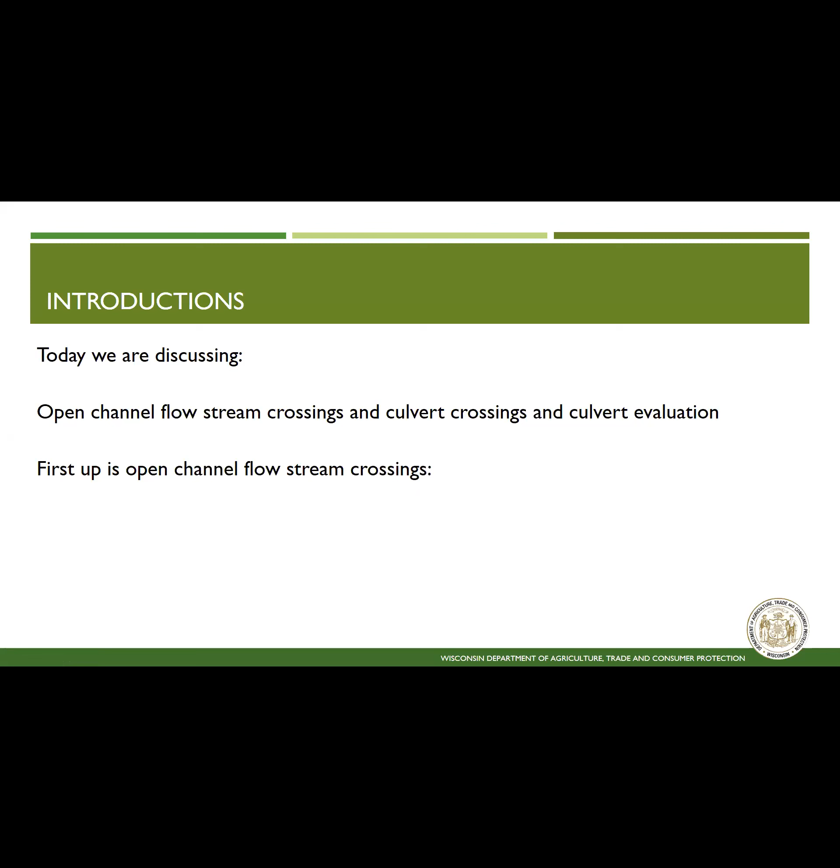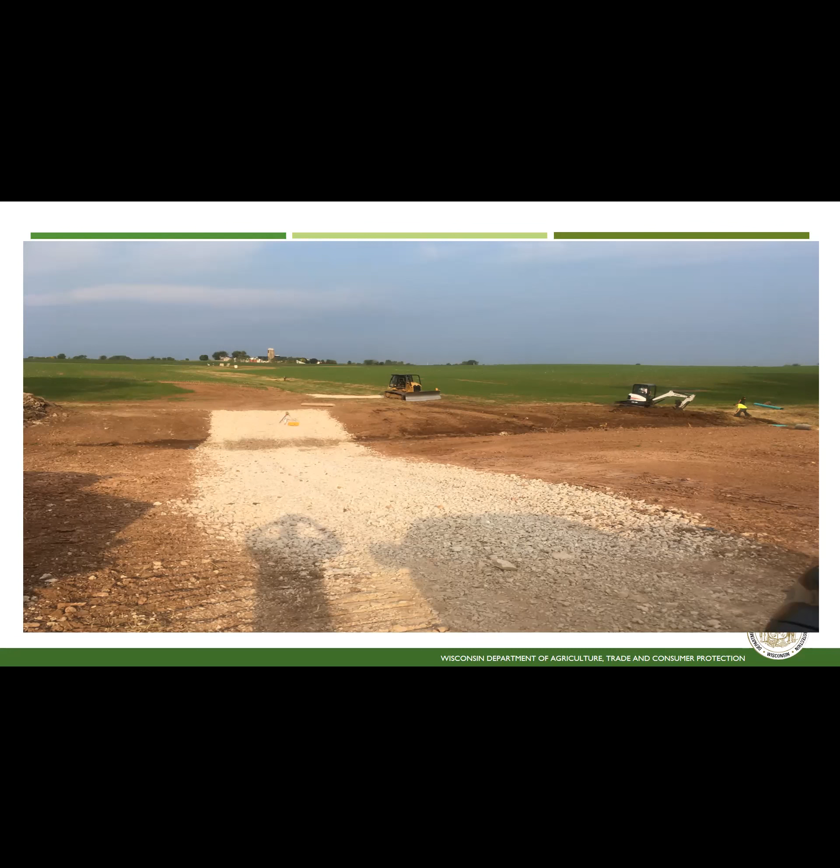This is another crossing. This is a simple one. And again, crossings are simple. This is a crossing in Fond du Lac County where we're simply crossing a diversion. This is during construction, so it's a little muddied up.

But crossings are simple best management practices to address the resource concern of getting from one point to the other, whether it's animals or whether it's equipment. So you have to have a fundamental knowledge of this, because when you're doing other larger BMPs, grass waterways, terraces, diversions, stream bank protection, at some point in time, you're going to want to cross and get to the other side.

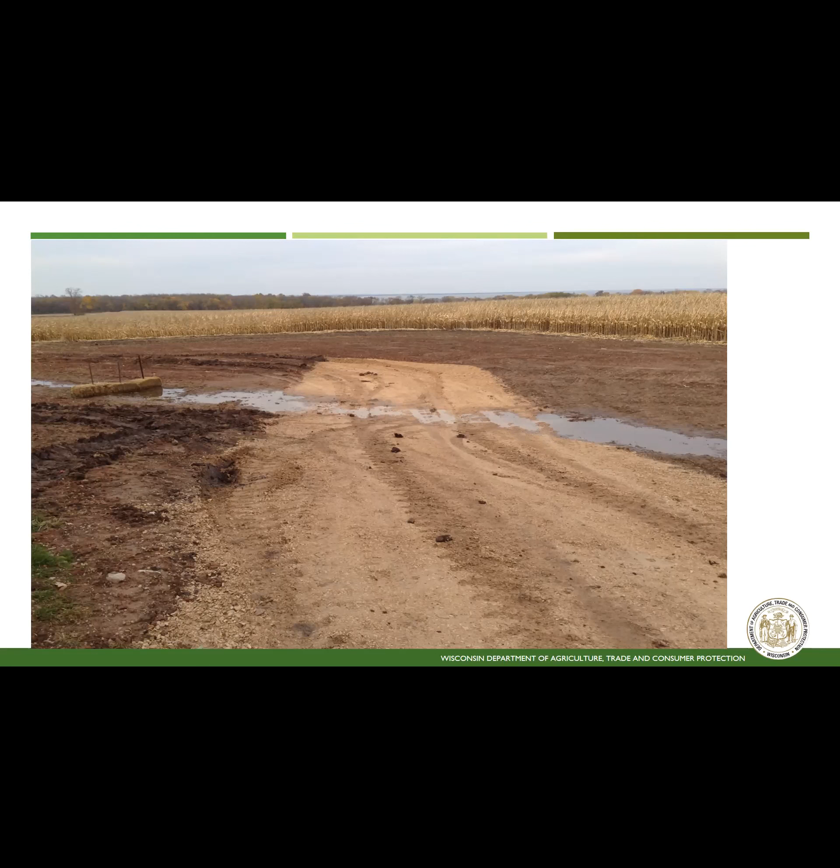So I encourage you to listen to what I have to say. This is not an in-depth design course. I only got 45 minutes, but there's a lot of resources out there, and you have a lot of resources right within your department just by looking at the list of folks. There's a lot of folks out here who design more crossings than I have. But it's a practice that you should know. Every up and coming technician should be able to design these open flow type practices.

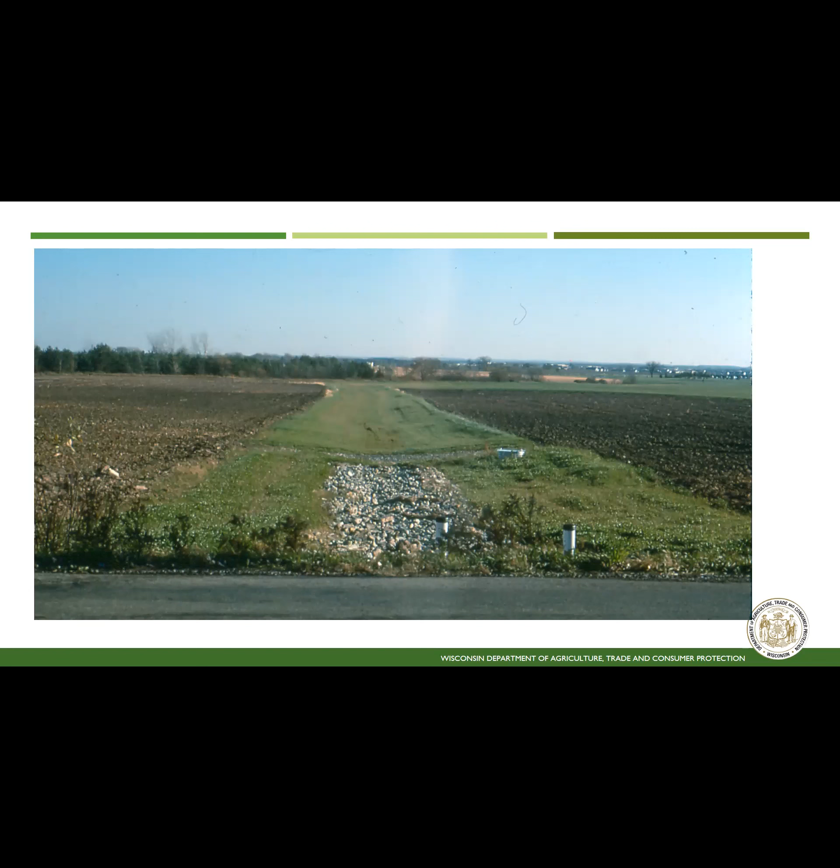So what are we doing? Well, we're referring specifically to NRCS Conservation Practice 578, stream crossing.

One of the things I have to remind you, and I encourage you to do, is read the standard. And I know that sounds really basic, but I read the standard, and I read the standard, and I read the standard. When I design a practice, I read the standard to make sure I read it. When I'm reviewing your designs, I read the standard. I read the standard until I'm blue in the face, because there's always stuff to pick up in it. One of the things I personally try not to do is memorize standards, because they change.

Their standards are going to change every 2 years. We tweak things, we add things, we subtract things. As conditions change, we might modify the standard. Back in the day, we had 2 standards for manure pits. Now we've got 1. So again, I cannot emphasize the fact that when you're working on these practices, the standard is there. They're fairly robust standards, well thought out. And I cannot emphasize enough, read the standard.

So the big thing here is in the 578 standard, it'll have a statement like in every other standard. It'll say condition where practice applies. And this will say, hey, if you're going to do this type of practice, this is where it works. So this is from the standard. You'll see I'll paraphrase a lot from the standard in my presentation. So again, the default is always read the standard. But where does this practice apply?

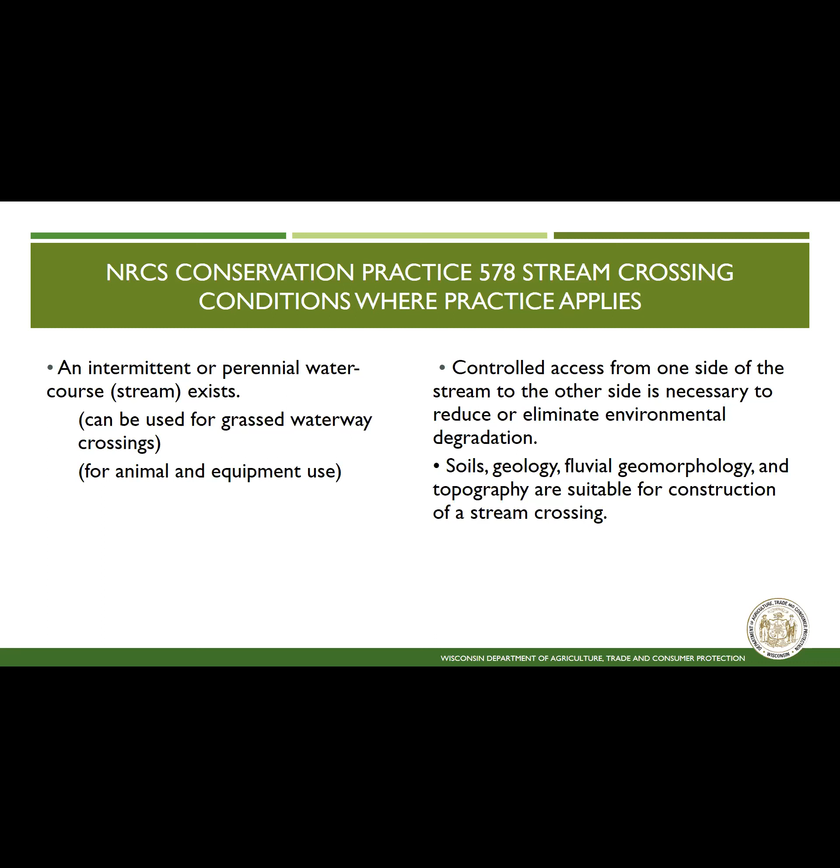We're going to focus a little bit on planning, then we're going to get into design, and then we're going to talk a little bit about construction. And it's not just going to be all PowerPoint presentation. I will let you know I have a lot of photos, and we're going to do some discussion. So again, please chime in either via the chat room, or if you want to unmute yourself, I'm all for that too.

Big thing with location considerations: locate the stream crossing where the stream bed is stable, or it can be made stable. One of the things you don't want to do is put a stream crossing where, the first time the landowner drives through it, they get stuck. That just undoes everything you did. So you have to do an evaluation of whether or not that stream bank is stable, or whether it can be made stable. And what I mean by stable, can I add stone to it?

Can I add a geotextile to it? Can I manipulate it in some way, shape, or form so that when I drive through it, or the animals walk through it, I've got that resource concern protected? That's where, a lot of what you're going to have, especially in this practice, you're going to have a lot of best professional judgment.

You're going to have to make those evaluations by physically taking a look at it. You want to avoid placing crossings where the channel grade or alignment changes abruptly, where excess seepage or instability is evident. You have to look not just at the crossing site, but upstream and downstream from it. You don't want to place that crossing where it's going to be unstable, because the creek or waterway might be in unstable condition. You don't want to put a crossing right before a corner on a creek, because that's where high tractive stress is going to be. So you have to look at it in terms of geomorphologic placement, preferably putting it on a straight section and minimizing impacts.

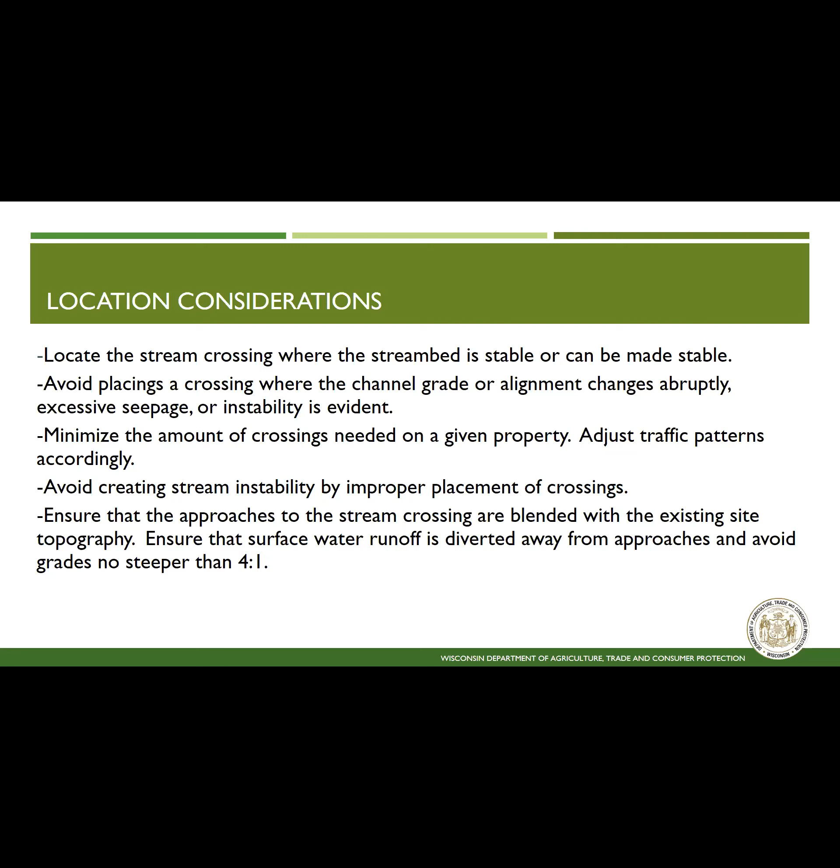Make sure the approaches to the stream crossings are blended with the existing site topography. Crossings are great, you get yourself across the creek, but how you physically get to them might be a whole other matter. You might actually transition from a crossing into an access road, so you'll go into the access road standard, and you'll see that in a couple of these photos.

Other considerations: you want to know what the landowner is going to use it for. Am I going to run cattle over it, or am I going to run combine equipment? I had a question yesterday about that—they're going to run combine equipment. How high does it have to be, with large equipment versus small equipment?

What you have for existing soils—you have to do that on almost every practice. It's called foundation investigations. You want to look at what you've got and make a determination whether the foundation is soft or firm. You can do that by sticking your boot in there. You step in it; if it feels firm, it's firm, if it feels soft, it's soft. It sounds simplistic, but you have to physically go out and look at it, and maybe get your feet wet a little bit.

You want to avoid wetlands or low areas. Some areas you can't avoid it—you can put a crossing in a wetland, but it's going to be hard to get permits, it's going to be a little more rigmarole, and it's going to be a lot more robust. But I certainly don't recommend it.

You need to know whether it's year-round use. You go out on a day like today where you still have frozen ground and the animals still need to get across—can I use it year-round? Is that something the landowner can manage? Can they plow snow off it? Does it get too icy? When do I need it? If they're going to need it year-round, it's going to have to be a lot more robust.

Most importantly, you don't want to obstruct normal flows. One design criteria says the channel cross-section in an open channel has to exceed the channel cross-section of the existing channel. We'll get into this a little bit, but you can't obstruct normal flows. If your crossing obstructs normal flows, water is going to go where it's going to go—most likely around your crossing—and it's going to erode on the flank. You also want to avoid seepage, excessive grades, or channel alignment changes. Those are just bad conditions you want to avoid.

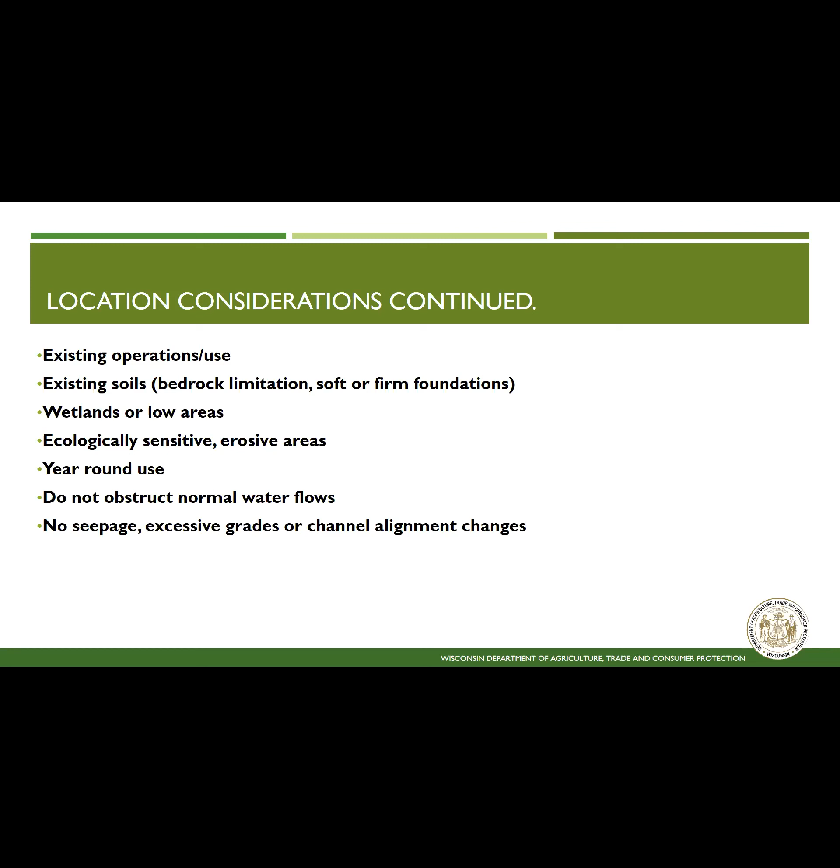I stole this from the presentation last week, and I thought it was pretty good. This is a creek that was actually destabilized by a poorly installed crossing. I stole that from the 580 presentation—I think it was two weeks ago. I thought this was perfect for my presentation.

If you look at the photo on the left, that's the downstream photo, and the photo on the right is the upstream photo. The issue here is that the crossing they're standing and looking down at is actually above the bed of the creek, so it's actually functioning as a minor dam. It's going to pond water behind it, which will drop the sediment out, and then force the water over top of that, creating an unstable condition below it, which is probably causing some type of head cutting.

By improperly placing this crossing, you're opening yourselves up to all kinds of future possibilities for failure. So be cognizant of where you're placing it, and make sure you get below the grade of the stream bed.

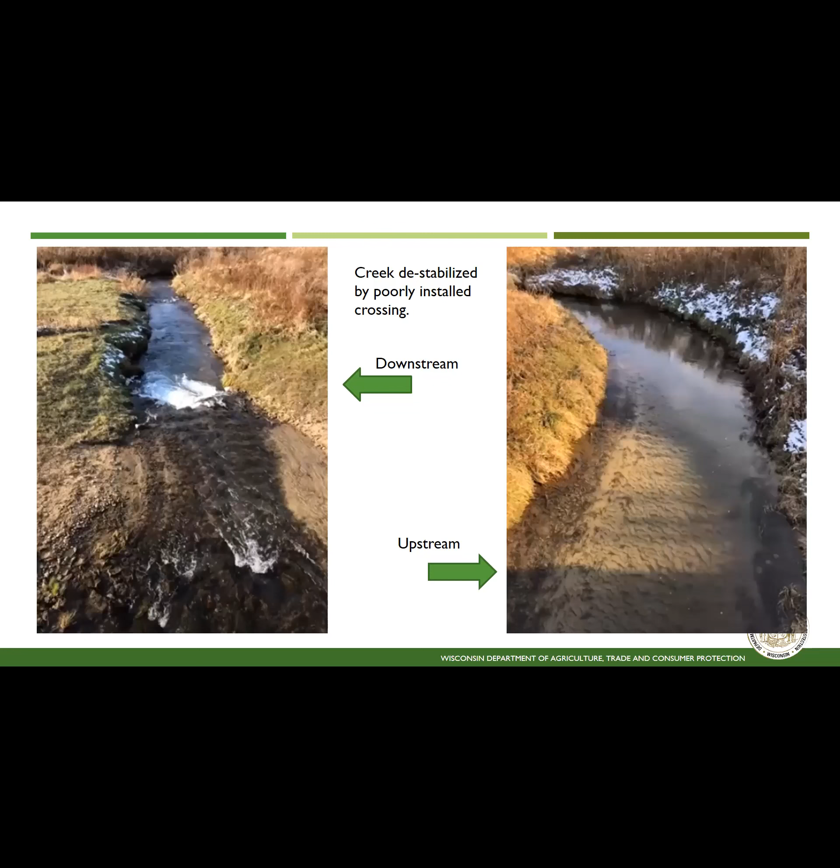You look at this photo, this is a concrete crossing with precast panels. Looks good, I don't do a lot of these myself, but I looked at this existing condition. What's wrong with this photo? In low flow conditions, which still carry the base load, it's above the elevation. So there's no question in my mind that at some point I'm going to get a sediment deposit, or if the water can't pass this because of the crossing and excessive vegetation, it'll find its own path, likely beyond the protection you provide at the crossing. So be cognizant about how you place these culverts in the watercourse.

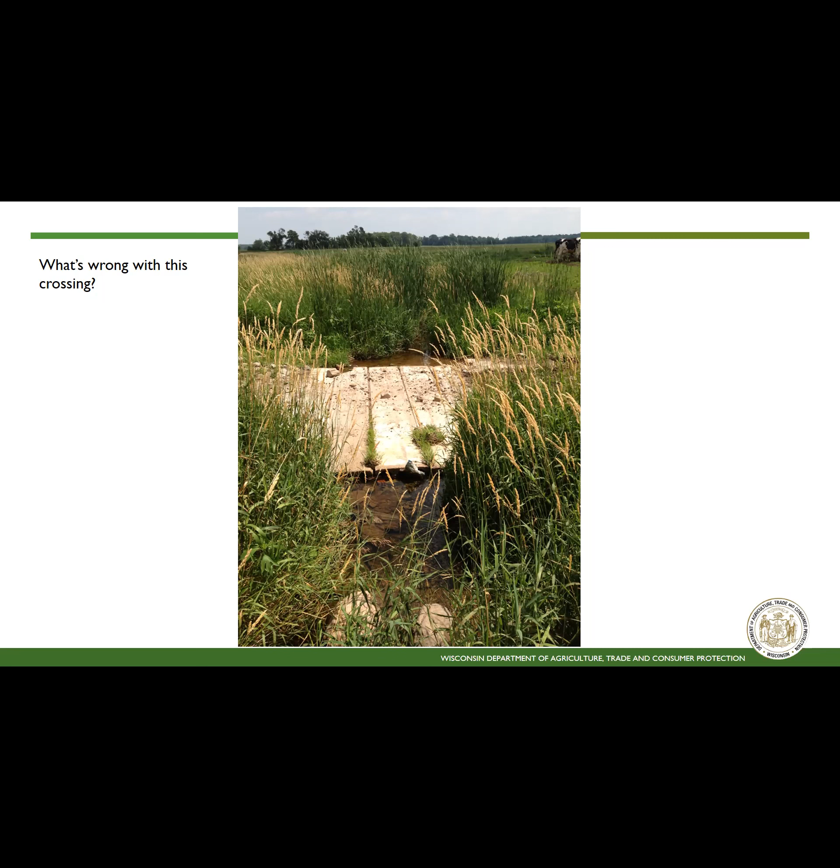The technician really worked on this stream bank. Since I've got a farm here and here, the landowner needs to cross. What I like about this crossing is even in this sinuosity, this curvy section of creek, the technician picked possibly the straightest section he could to install that crossing. Then he installed it well beyond what he considered the 10-year storm or bank full flow - you can see it extends well out, so it's protected. It might not be protected in a flood event, but he took it well outside and tied it in with that protection, so there's no gap.

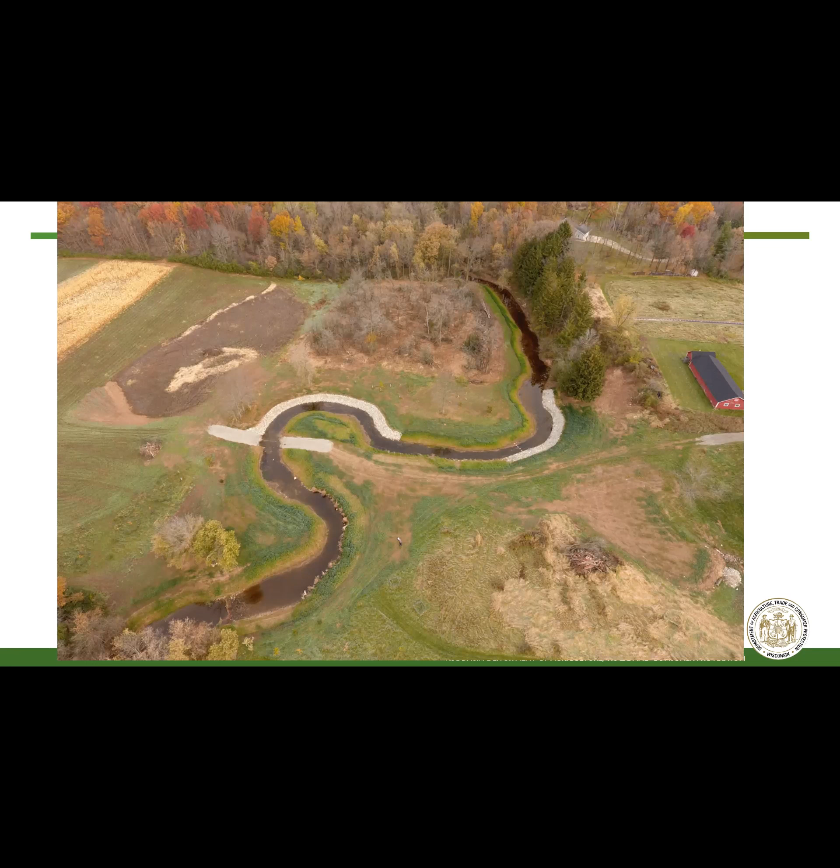The crossing width mimics the width of the stream, both upstream and downstream from it. So to me, this looks like a pretty well planned crossing, and ultimately it should be a success - meaning it's around for a while. Last year, in 2018 and 2019, we had a lot of severe hydrologic events, a lot of practices failed due to conditions. We're getting to the realm where we have to make these practices just a little more robust than the 10-year storm, due to the rate we get storm events now.

This is another typical use of a crossing. Here you've got a grass waterway, nicely netted with an erosion control blanket. The landowner needs to get across to that grass waterway, and instead of going through multiple points, we opted to do the crossing at the end. It's a smaller crossing, and below we have a good wetland scrape in wetland enhancement. We actually pulled out some cattails and created open water habitat as a means for a stable outlet. We're also using this crossing as a stable outlet before it gets into the wetland. Folks have tried this before - this isn't a classic use of it, but it's one way to do it.

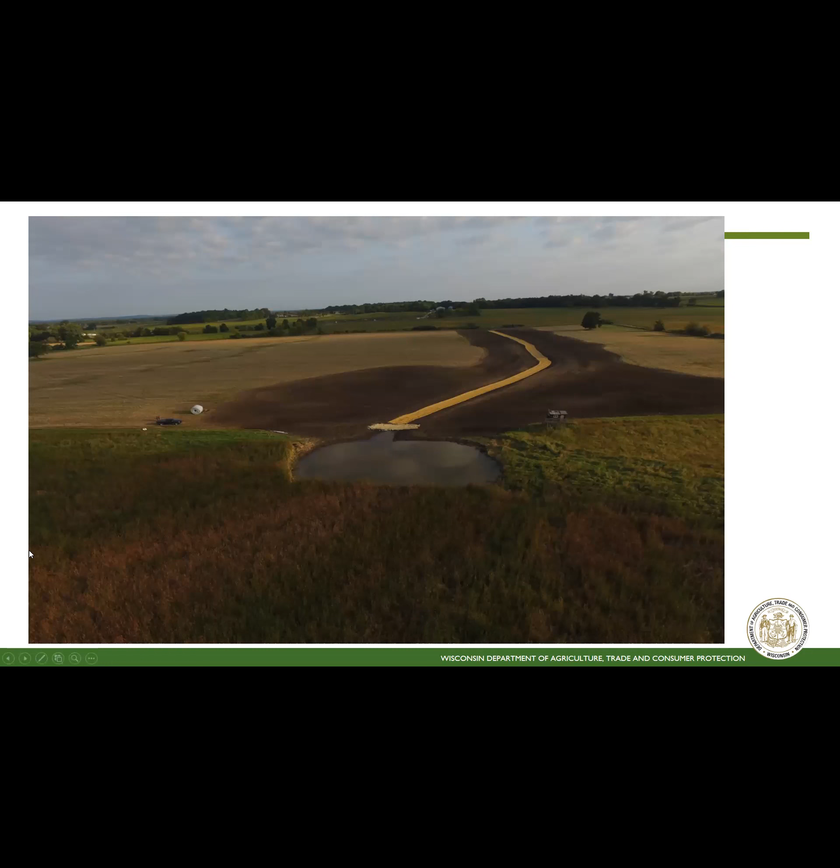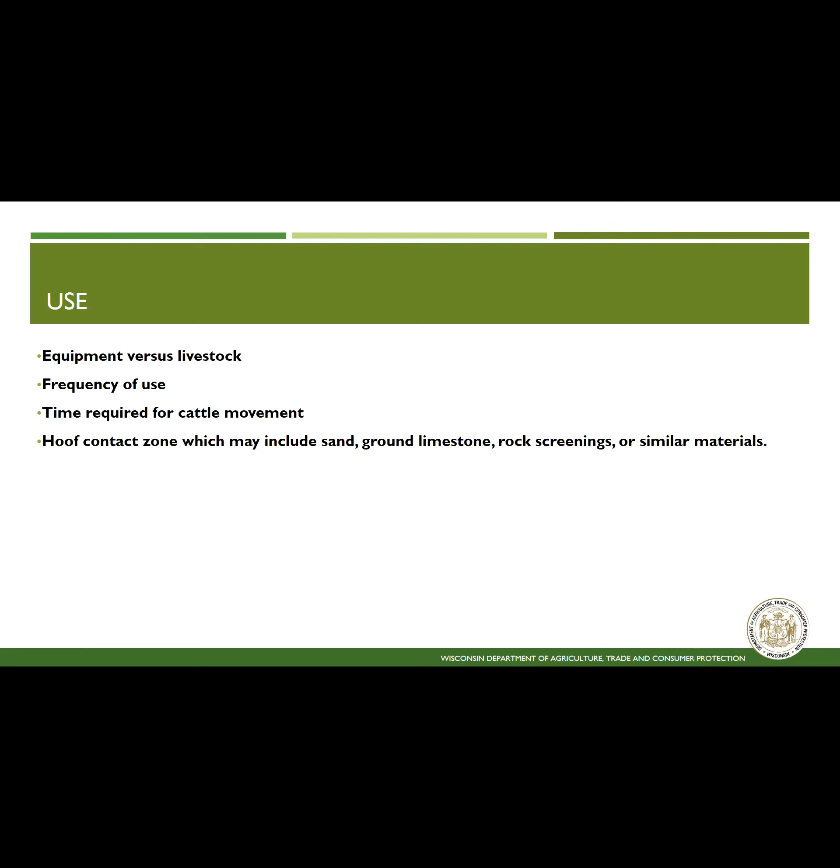Keeping in mind, hoof contact zone is kind of a sacrificial material. We're not designing the hoof contact zone for the 10-year storm or bank full flow, but we're designing for the animals. So I specifically ask the landowner on that. If other people have different thoughts on it, I'm all ears. But that's just kind of been my practice in the last some odd years I've been doing this.

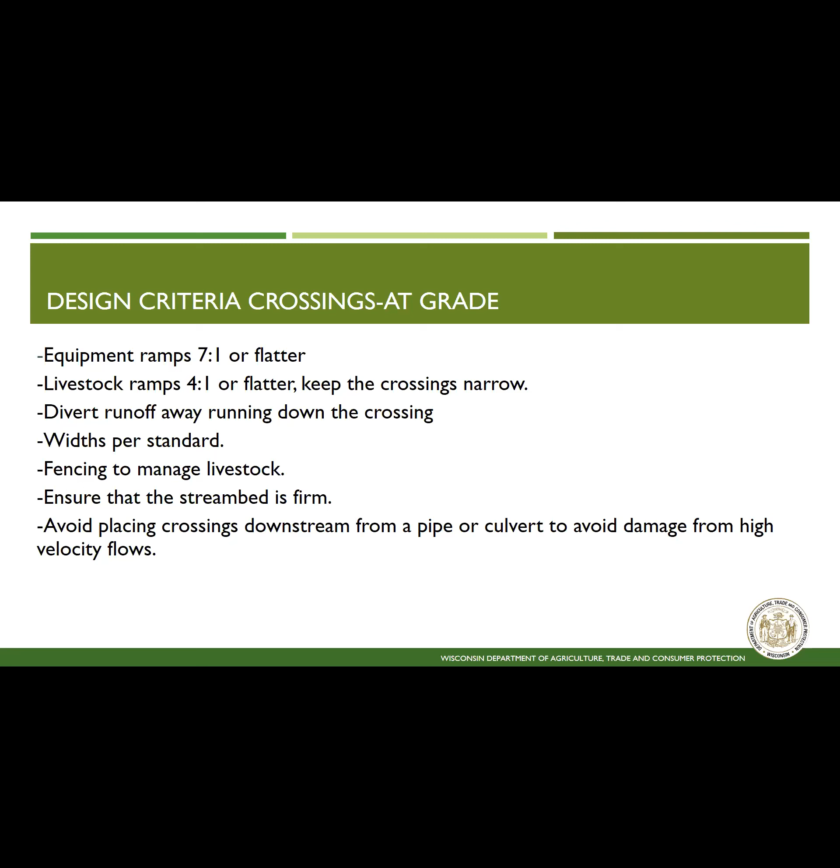So when I do have a flood event, I've got total containment. I don't have a weaker area for that flood flow to go around. And here the fencing is robust enough that I think it will be able to sustain what we need to do. Here's another view of it looking the other way, and it takes it well up into the crop field. So this is a classic example of a crossing that has been combined with an access road, and it looks like a big crossing, but it's really two different components blended together, and it looks awesome.

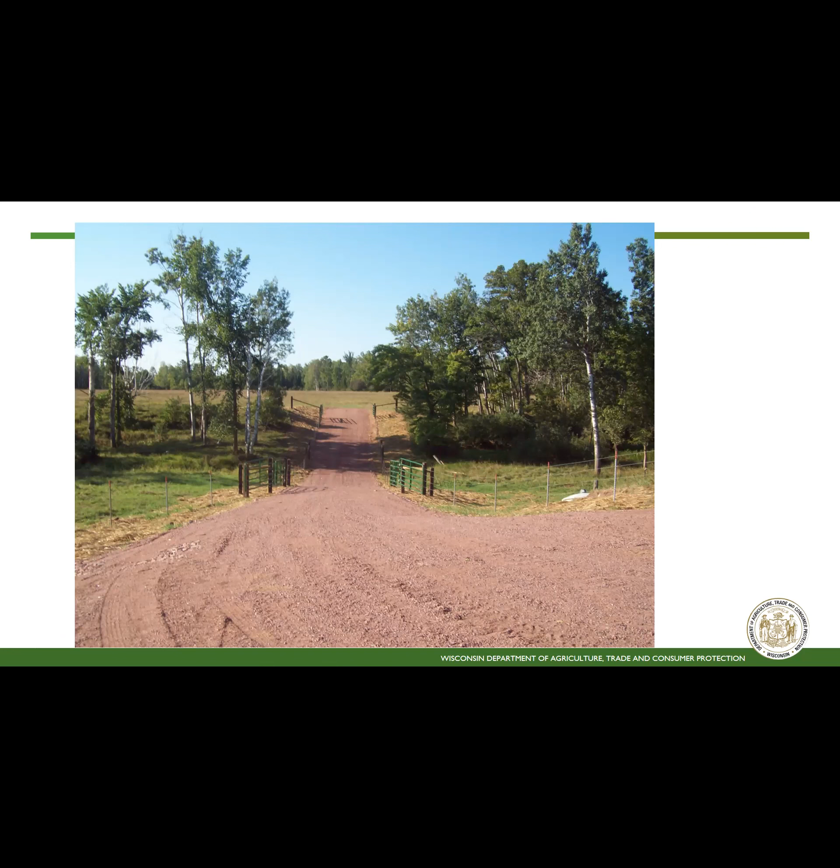Okay. All right, design criteria, crossings at grade. Ensure that the cross-sectional area of the crossing is equal to or greater than the natural channel cross-sectional area. This is critical, okay? Typically, when you're going to make this crossing, you're going to give it a greater area, but you're going to run a survey through the existing area where you're actually going to plan the crossing. What you plan beyond that has to have a greater cross-sectional area. If it doesn't, you're squeezing that creek tight, and that creek is still going to find a place to go, and it's either going to flank you or cut into your crossing or do something you don't want.

So you have to ensure that the cross-sectional area of the crossing is equal to or greater than the natural channel cross-sectional area. You do this by taking a survey, plotting out that survey, and then overlaying it with what you're planning on doing. Hey, I'm going to do a crossing that's 12 feet wide with 8-to-1 side slopes. It'll show you in the design calculations that, yes, you've addressed this component of the standard.

To the extent possible, design the top of the ford crossing to follow the contours of the stream bed. Right? That's the best way. Now, again, Pete just brought up that point where you've got that thalweg channel, or lower flow channel, that might be a sediment concern. So that might be something to consider if you're in a high sediment producing area. If you're in a forested environment, maybe it's not a major issue. But if you've got a high sediment load agricultural area with a lot of erosion, you've got to think about it.

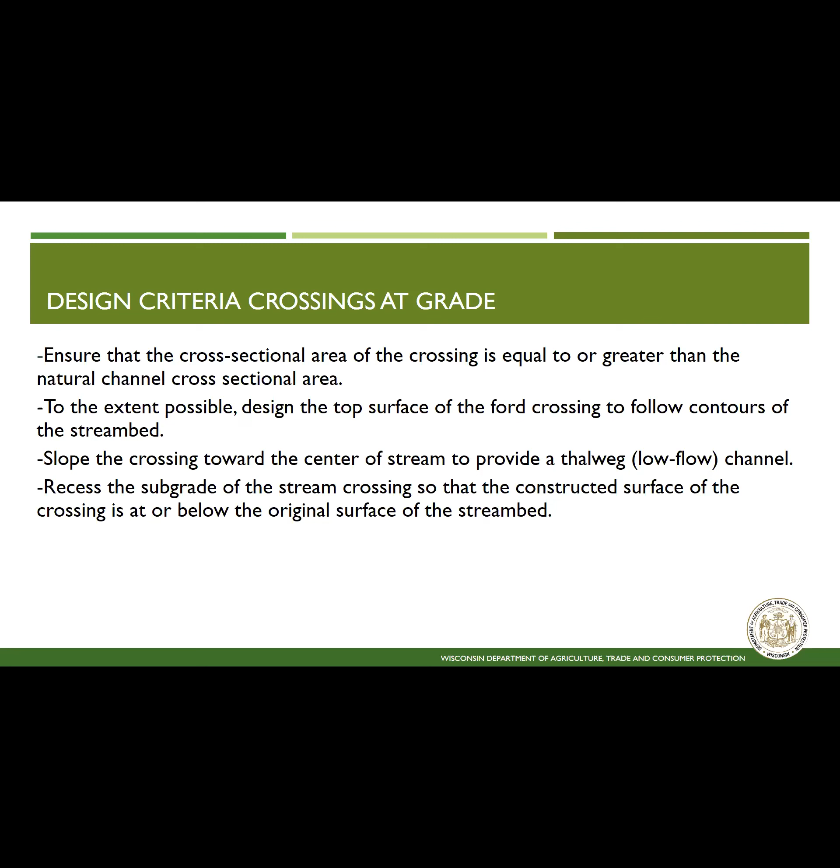All right, Kelly, what do you got? Let's see, since it's mostly related to what you've got going right now, I had a question from Josh: after the rock is placed, is topsoil ever placed back on top and seeded over? Say I have a stream crossing at a park where the trail is used for hiking and small machinery, so having a seeded top would be preferable.

Yes, or you could keep it as rocks. You could do that, but again, all your top dressing is kind of sacrificial, and that's where you've got to use your judgment.

For example, say you do your crossing and top dress it with soil, put down an erosion control blanket as much as possible, and it's not a wet period—not a period of high inundation like 2018 and '19. You put your topsoil down and get some seeding established. You have to accept some loss, because people are going to walk on top of it, and you're putting an erosive material within the crossing you're trying to protect. But on the flip side, you still get some protection from that vegetation.

So to me it's a practice worth trying. One thing I tell people who work with me: I don't have to get a 100% solution. If I get a 50% solution, that's better than nothing. So especially for a trail in a park setting, where you've got other factors involved, it's certainly worth an attempt.

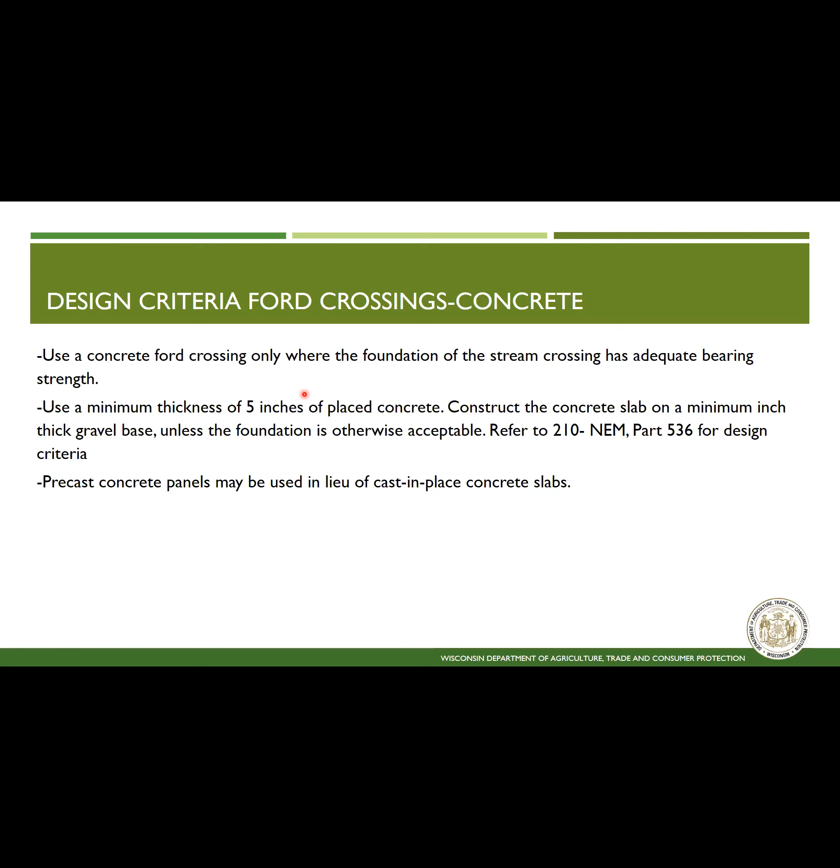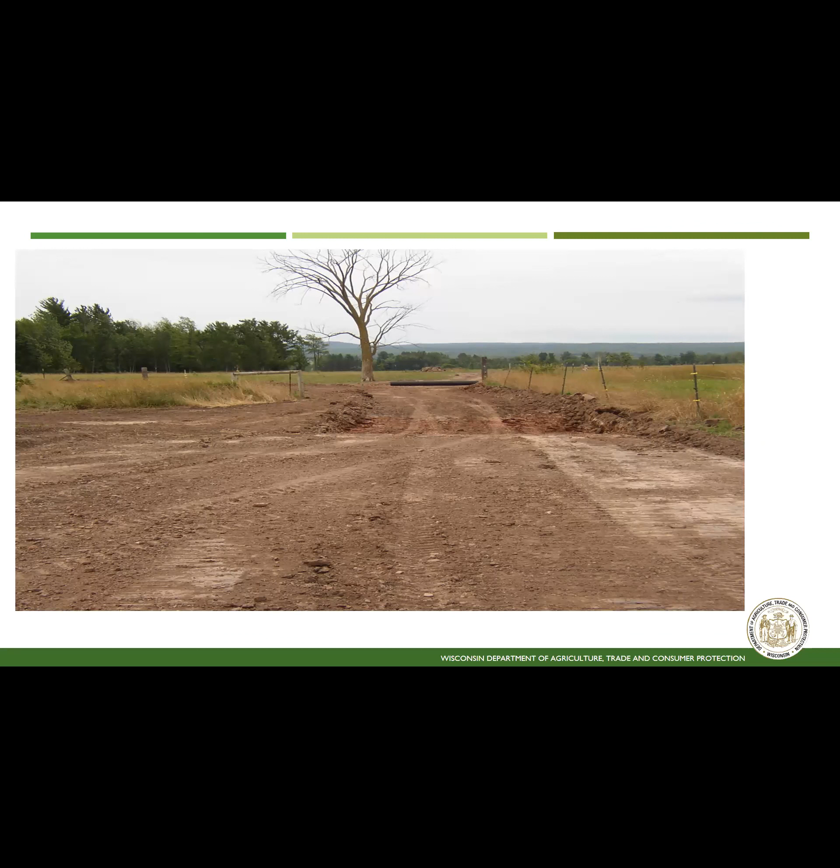So this is a photo of the excavation for a concrete crossing. You look at this and you say, well, this looks like a good solid clay material, so it should be robust. You form it out, you put your reinforcing steel in there, and you pour your concrete. This is another one—a longer one where they took it well beyond.

This is a nice option, it provides a decent, robust surface, and it gets to be a little bit fairly pricey. I know I'm encroaching on my time a little bit, so I will speed this up.

Design criteria for rock crossings: this is typically what we do. When you use a geotextile, you use it when you have a soft or unstable subgrade. You're always going to use non-woven type 2, class 4 is most used. I never in my career use woven geotextile because I don't want to do the percent fines test below it.

Make sure you go to Wisconsin Construction Spec 13 for the details on the types of geotextiles. More importantly, if you're not comfortable with that specification, go to the guide for use in the Engineering Field Handbook, Chapter 17. There's a guide for use for this specification, and it really does an awesome job explaining what woven geotextiles are, what non-woven geotextiles are, and what the tables really apply to. If you got questions, you got plenty of DATCP staff out there that can step you through that.

You're going to cover the geotextile or excavated bed with graded rock as shown in Table 2. Table 2 is fairly straightforward, I pulled this right out of the standard. If you got soft foundations, you got 18 inches, or 8 inches underlain with geotextile. If you got firm foundations, you've got 8 inches.

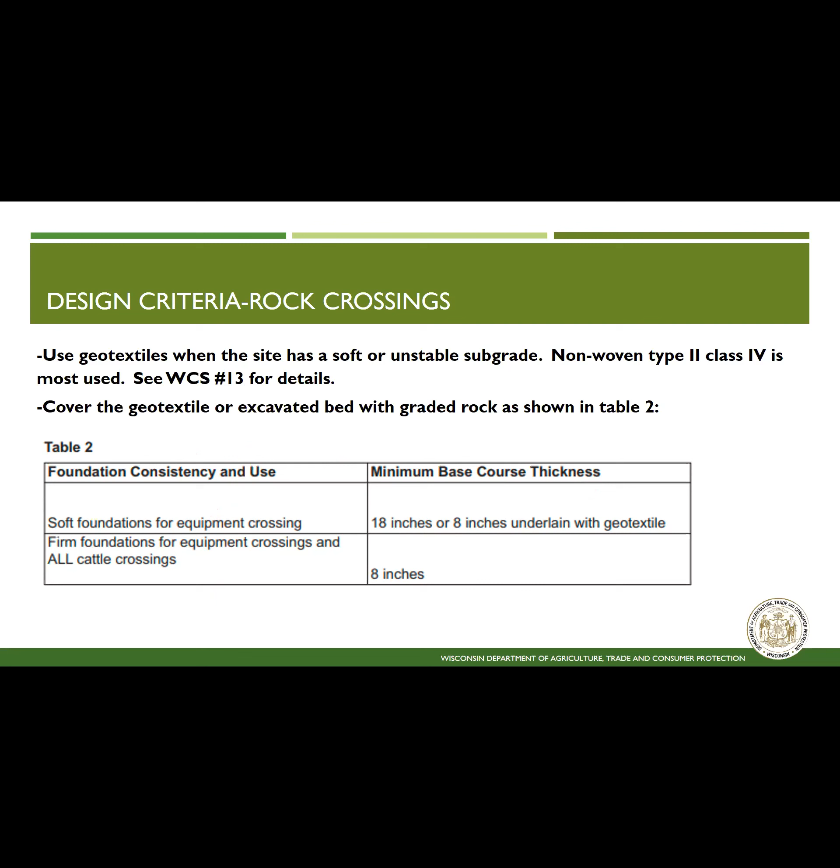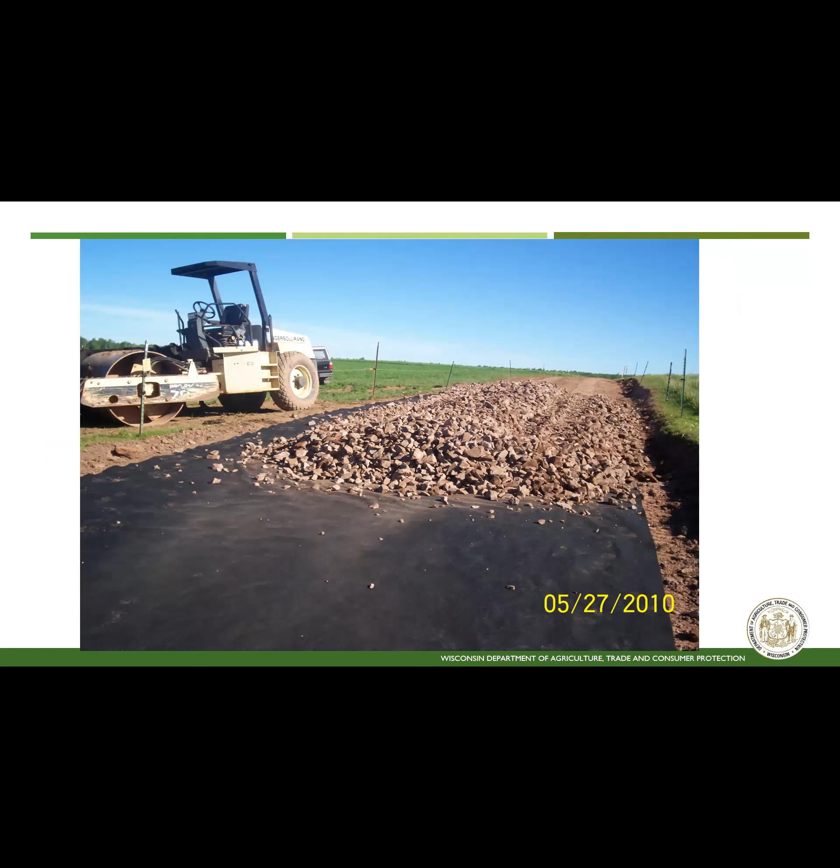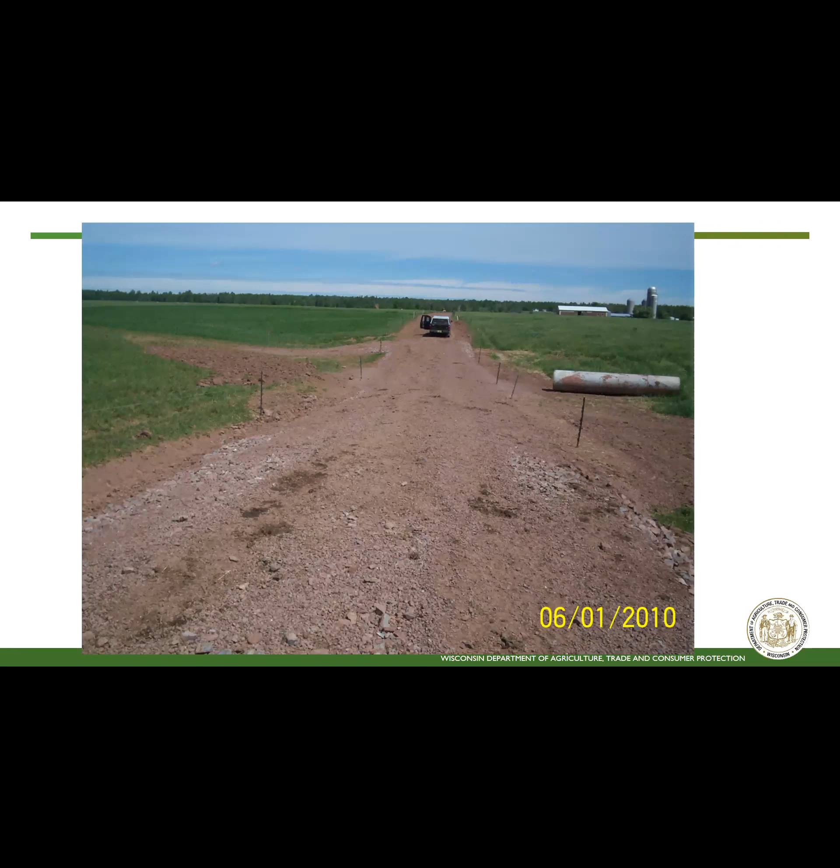Most of the crossings I do that I get involved in use some type of geotextile. And then here's the top dressing, and that's showing the hoof contact zone. Final product. Geotextile really gives it a lot of strength, and when you got a little bit of seepage, it's pretty decent.

So here's a big statement, right out of the standard. Okay, so now we're getting into design. We shift gears from planning. We really want to know, how do I design this, right?

You need to design the rock ford stream crossing base material - in other words, the stuff that's going to resist that design flow, not the hoof contact zone. It's got to be stable for the 10-year storm or bank full flow, whichever is less. In other words, I'm going to figure out what that 10-year storm is, whether I use EFH2, TR55, or USGS method.

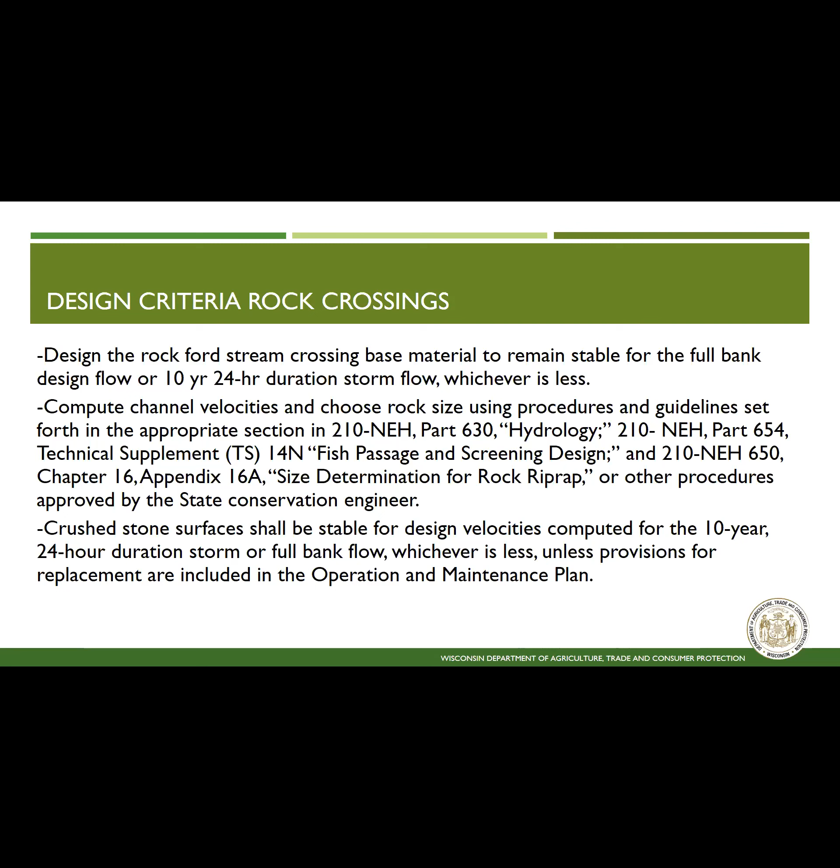I'm going to put that quantity of water in my cross section, and I'll show you the spreadsheet to do this. I will see what elevation that 10-year storm is, or by visual means, I'm going to determine what my bank full elevation is. Then I'm going to use an equation called Manning's equation that will help me get my velocity.

I will tell you my default is the 10-year storm because I think it's more conservative. I'm very aware of climate change. I had a couple of practices fail, especially last year.

I'm more conscientious that maybe our practices are not as robust as I think, especially just the way things are changing. So I've decided that I'm going to be more conservative in my design. In a lot of cases, I automatically will drop to the 10-year storm event.

What this chart is, and I may be doing a little bit backwards, this is the stone size as it resists velocity. So you're going to use Manning's equation, which I'll step through in a little bit. That will help determine your velocity, and then your velocity equates to a stone size.

What this stone size - it says D50 in inches. What does D50 mean? D50 is the middle size stone in a given pile. So if you got a pile with 6-inch stones and 1-inch stones, your D50 size would be 3 inches. You're always designing for that median stone size, and it's basically based off weight.

So you'll have to run a gradation. We run a gradation where you've got big stones, a lot of medium-sized stones, and a few small stones. You mix them all together, you got a decent gradation. When you're doing these rock crossings, you have to design for a gradation, and you're designing for the middle-sized stone within that pile.

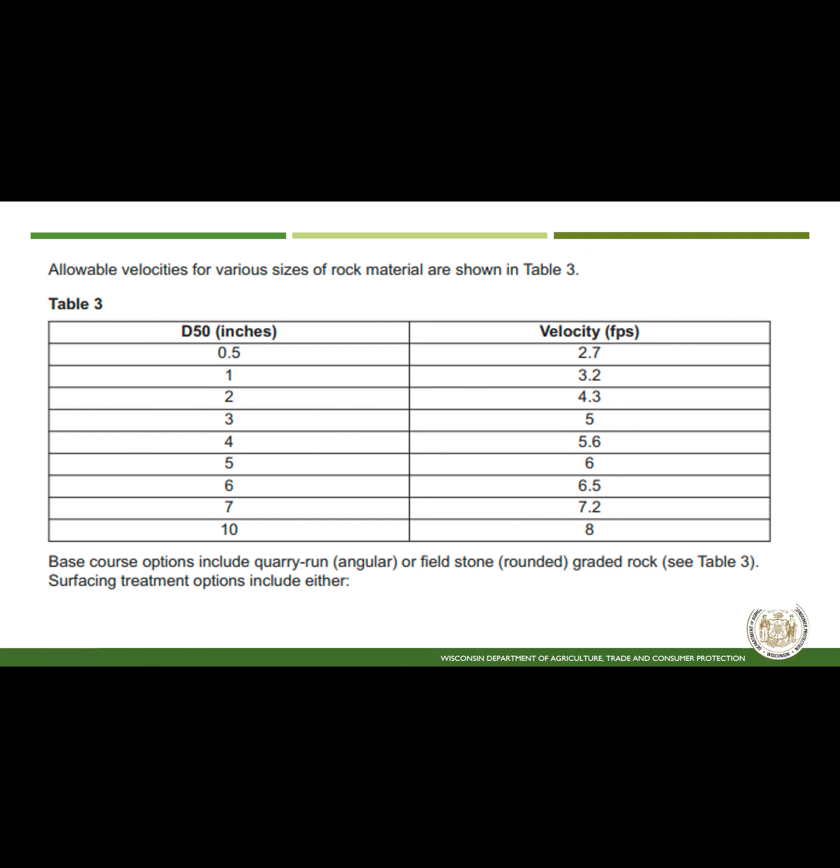Do you ever have the contractor bury or dig in the geo edges like on the standard drawing? The book answer is yes, but honestly, no, I don't. Not often. I think it's important on the upstream side for sagging, to be honest with you. But in most cases, it's rolled out, laid out, and that's just a technician talking. That's just what it is. I'm picky about overlaps, obviously, big time, and I'm very picky about the product.

I'm so picky on getting the right product. I ask for the manufacturer's test data before they buy it, and then I compare it to what's in WCS 13, so what they're buying is right. The apparent opening size, the elongation at failure, all these minimum test requirements, you actually meet them. So I'm more picky on the product, but I dig in upstream and downstream, upstream ends specifically, but on the sides, can't say I have.

Pete, what's your advice on that? You still there with me, Pete? Oh sorry, I was typing a comment, Drew, when I missed what you said. So do you bury the geotextile on the sides? I do it on the top ends, but do you do it on the sides? I haven't done it on the sides. I suppose you have to, but I don't.

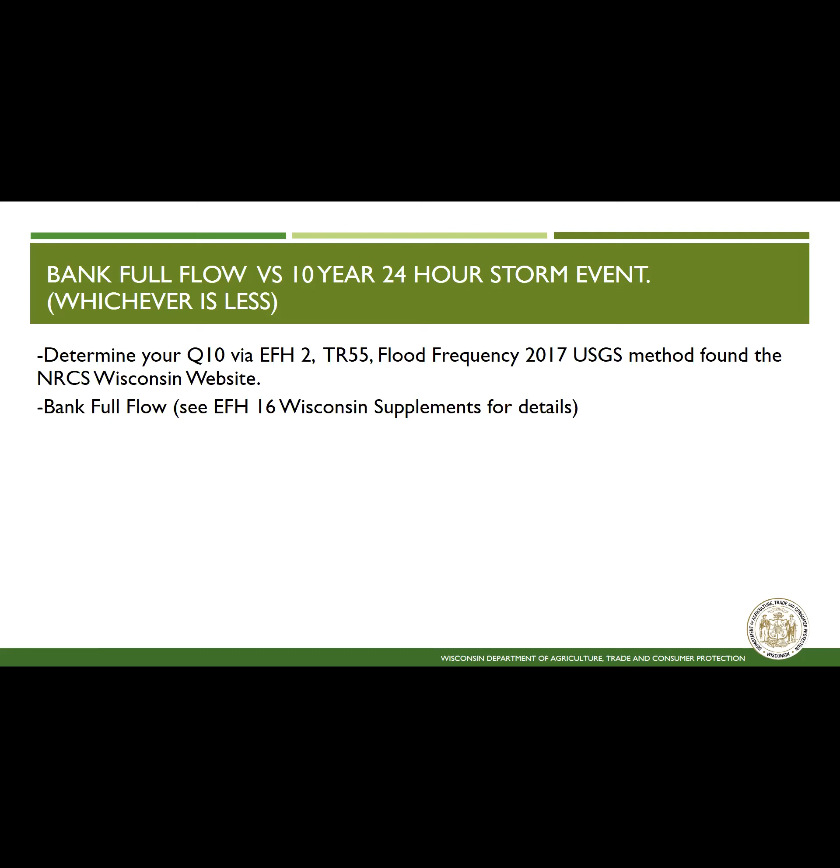That's good. Okay, so again, the standard says you got to design for the Q10 or bank full flow. Travis, I'm going to punch through this, man. I know I'm encroaching on your time by 3 minutes.

Here is a list of bank full flow indicators. I'm not going to read them to you, but I will tell you where this information is found: the Wisconsin Supplements, Chapter 16. It's specifically for stream bank design, but that's where I pull this information from. Make sure you're getting familiar with where the resources are. The stuff is right online. You go to the NRCS website, Wisconsin Supplements, and this will tell you what your bank full stage indicators are.

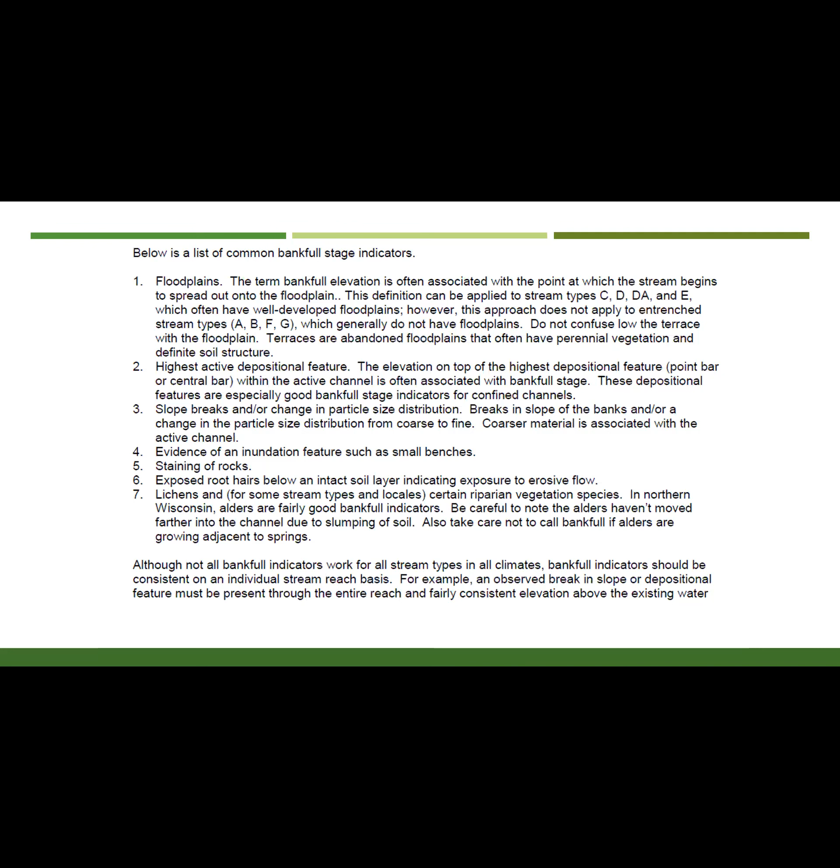Again, you have to design for the 10-year storm or the bank full flow, whichever is less. Here's 7 ways to determine what the bank full stage is. Once we get all that, we're designing by the velocity method, so we use Manning's equation, the most favorite equation that we all love and follow. It's the only equation that I actually can remember without looking at my prompts: 1.49 divided by n times the hydraulic radius to the 2/3, times the slope to the 1/2.

You run that equation with your Manning's n value, you will get velocity in feet per second. I take that velocity to table 3, and it will tell me what my D50 size stone will be. That then sets my gradation.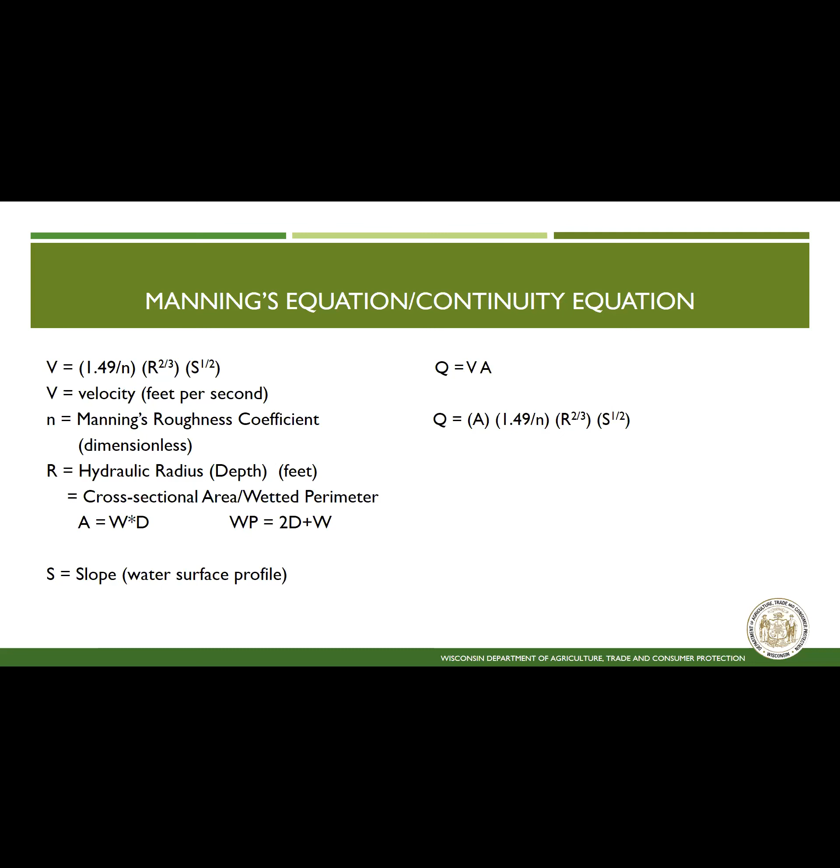Now, Manning's roughness coefficient, in layman's terms, is how smooth or how rough things are, and they equate that to a number. You could Google Manning's n values and there'll be a list a mile long. In a stream bank, you can either calculate it - this is pulled out of Natural Channel Flow for stream bank design. You can actually calculate it; here's your basic n value starting at earth, which is 0.020.

And then you add these modifying factors and figure your degree of meandering. I don't necessarily use this for a crossing. What I use is the formula method and the Manning's n value for the stone I want to use. Keep in mind when you're designing with stone, you want to make sure you can get the stone. For example, in Northeast Wisconsin, I can get D50 size stone 6 inches almost everywhere. My coworker, Ryan Glassmaker, told me that last summer it was hard to get D50 size 6-inch stone in Southeast Wisconsin because they were crushing it all down to gravel.

So I like to look at availability of stone, and then I use that Manning's n value. I know that getting a D50 size of 12 or more, which I don't ever use, but I know I can pull that out of the Valders quarry. So figure out where your stone is coming from and figure out what sizes you have available.

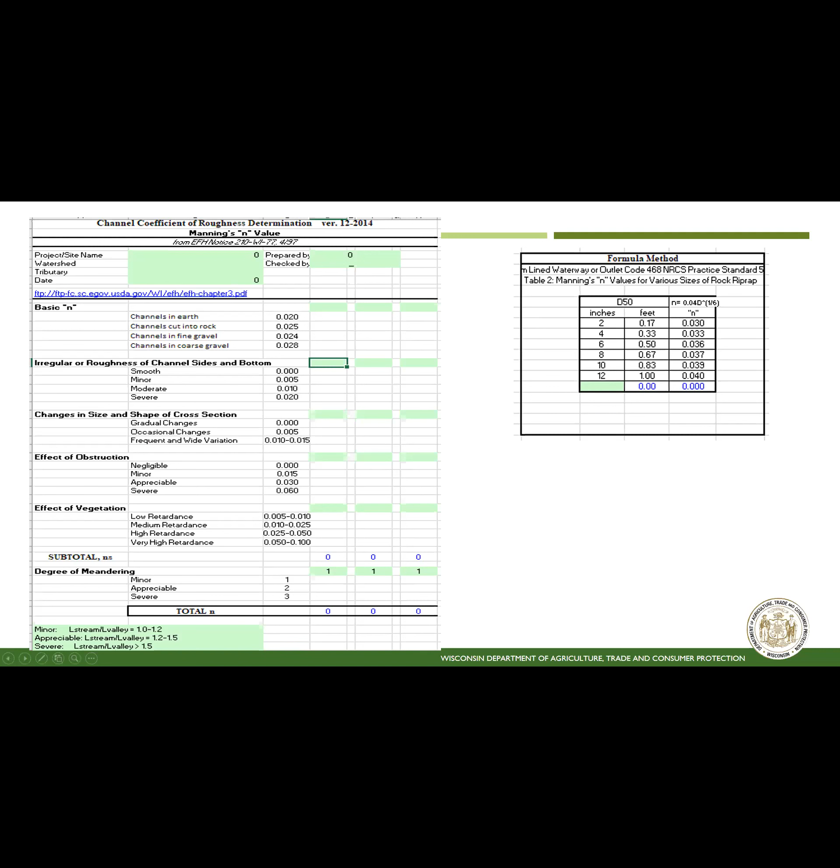You don't want to truck it three counties away because then your crossing is going to be ridiculously expensive. Use that Manning's n value and stick it into the Manning's equation. That will set your depth. Manning's equation, simple for open channel flow, you pull it off the NRCS website. It's fairly straightforward. Your inputs are your side slopes, your bottom width, which should be equal to or greater than your creek, your depth, and your slope in feet per feet, based off your survey of the water surface profile.

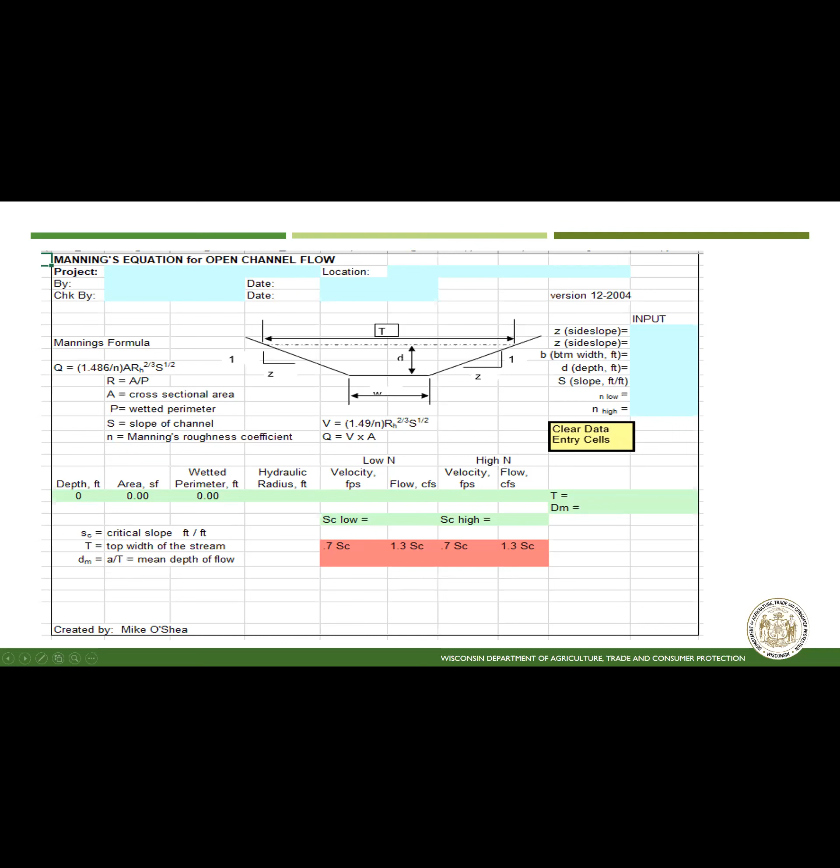This will size your crossing for you. You can also use this program, Natural Channel Flow. This is an awesome program where you enter in your cross-sectional distance, your elevation, your Manning's n value, your upstream water surface elevation, your downstream water surface elevation, which will get slope, filling in this Manning's equation, and then your water surface elevation within that channel. So you can move that up and down until you get the capacity of that 10-year storm.

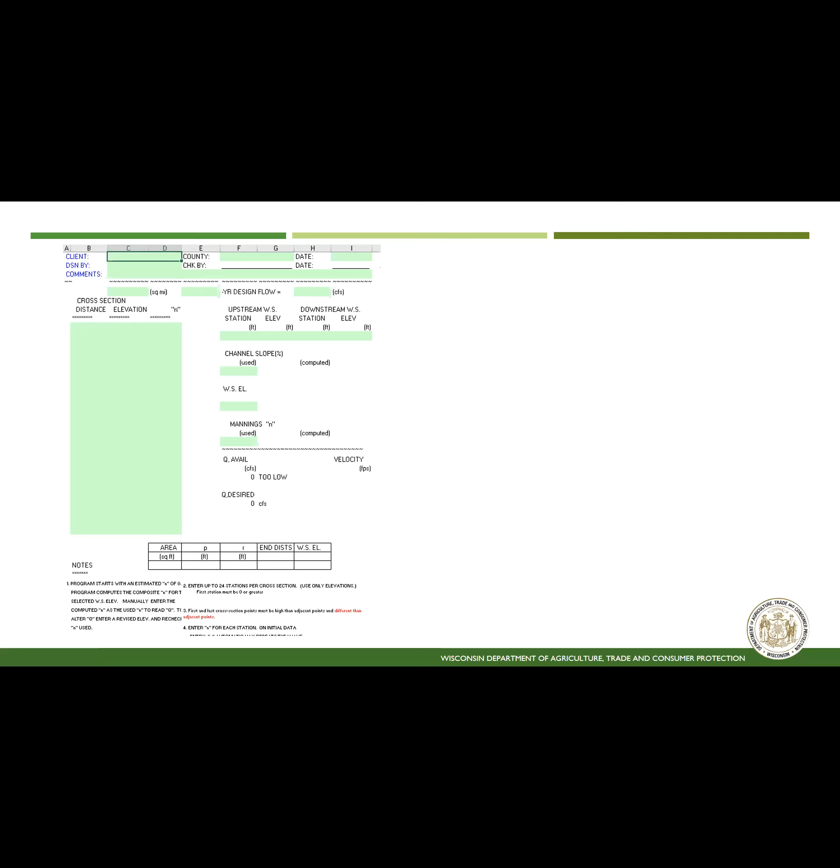So you're going to raise this elevation in your cross-section up until that 10-year storm fits into this. And I realize I'm going fast, but what I recommend you do is when you get to this point, call your DATCP and call your NRCS assistants, or more importantly, ask people within your counties. Again, I look at this list, a lot of experienced people out here. There's a lot of help out here. Don't try to figure it out yourself.

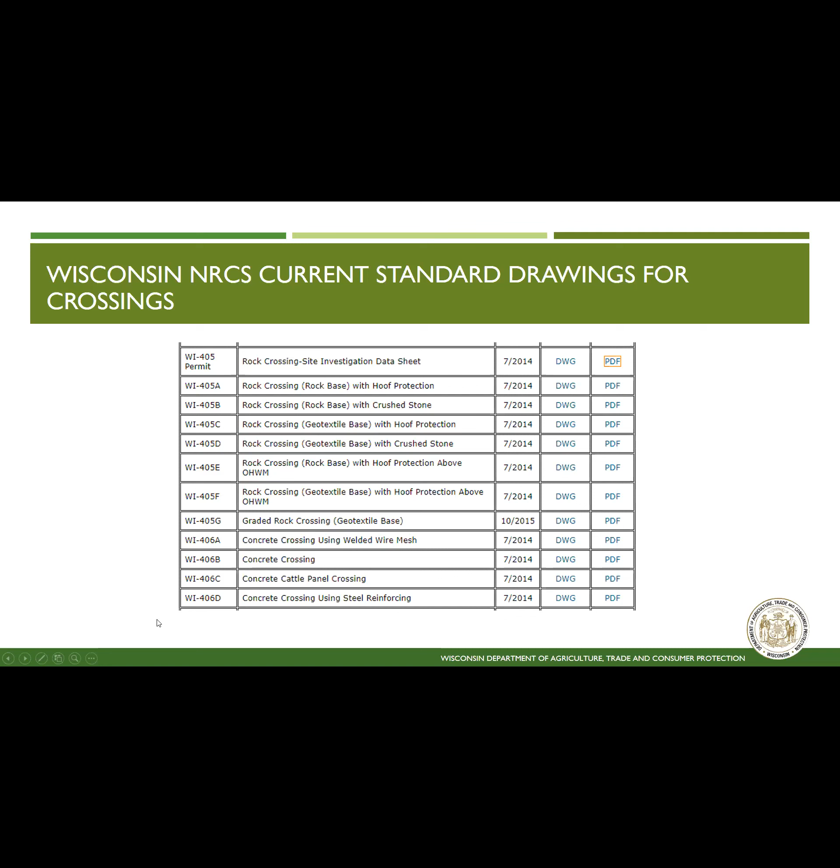This is a standard practice we've been doing for years. NRCS has a whole list of different standard drawings that will fit your application. They're 400 series drawings, I took this right off the website. So you want to look for what you might be using and then see what these standard drawings fit. There's very little need to change these, they're fairly straightforward. Depending upon your condition, there's a lot of them out there, so I'm not going to go through each of them, I'm just going to show you four examples.

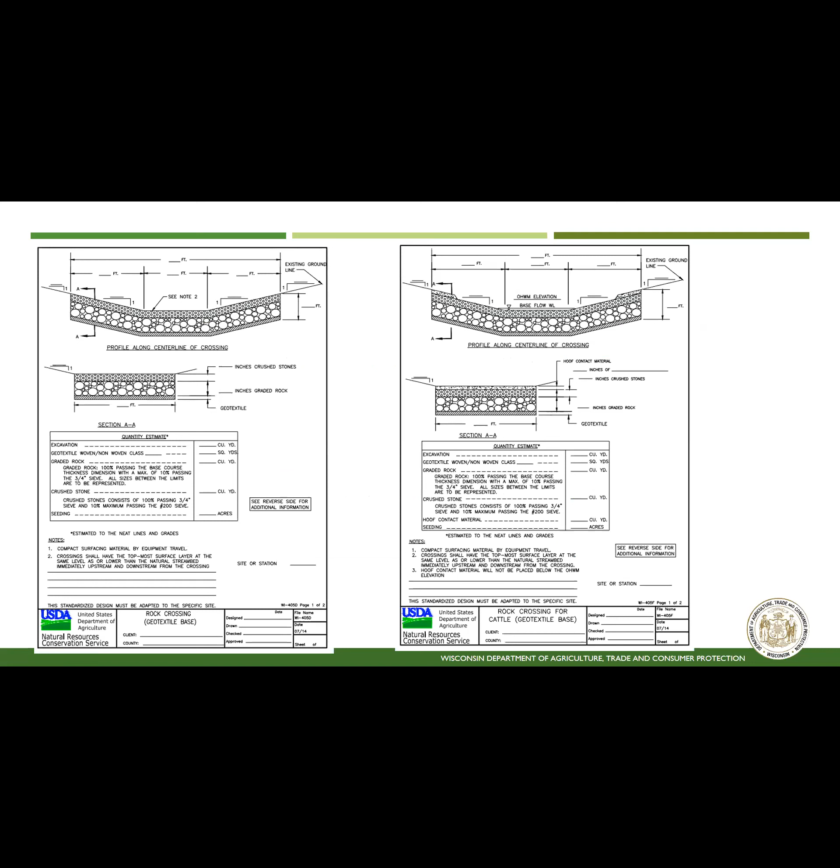They're basically fill in the blank, they're not very hard to do. And operation and maintenance - I know I'm pushing my time, I talked a little bit faster than I wanted to. Crossings, you want to inspect after heavy rains. You want to inspect for any type of hydrologic events because you're going to wash materials away. Remove that deposited vegetation and sediment and replace the hoof contact zone.

Again, when you get to the point where you're designing these, it's worth a 15-minute phone call to your area office staff, and they will step you through these spreadsheets. We just don't have time to do that today. So I know I went over my time, Travis, I do apologize for that. Kelly, do you have any further questions?

I do. Going back to when you started your concrete crossing, you mentioned bearing capacity. Someone asked if we needed on-site soil tests for bearing capacity. No, I wouldn't do that.

You know what, I think you can use book values for bearing capacity. Now, if this is going to be a very robust crossing, then maybe you want to consider it. But most of our applications, I look at it this way: if you're wrong with your bearing capacity and this thing fails, it's not that big of a deal. All right, we can fix it, we can replace it. These are not 365-day use crossings in most cases. So in this case, I think you're going to be able to use book values based off your soil type, and I think you're going to be okay.

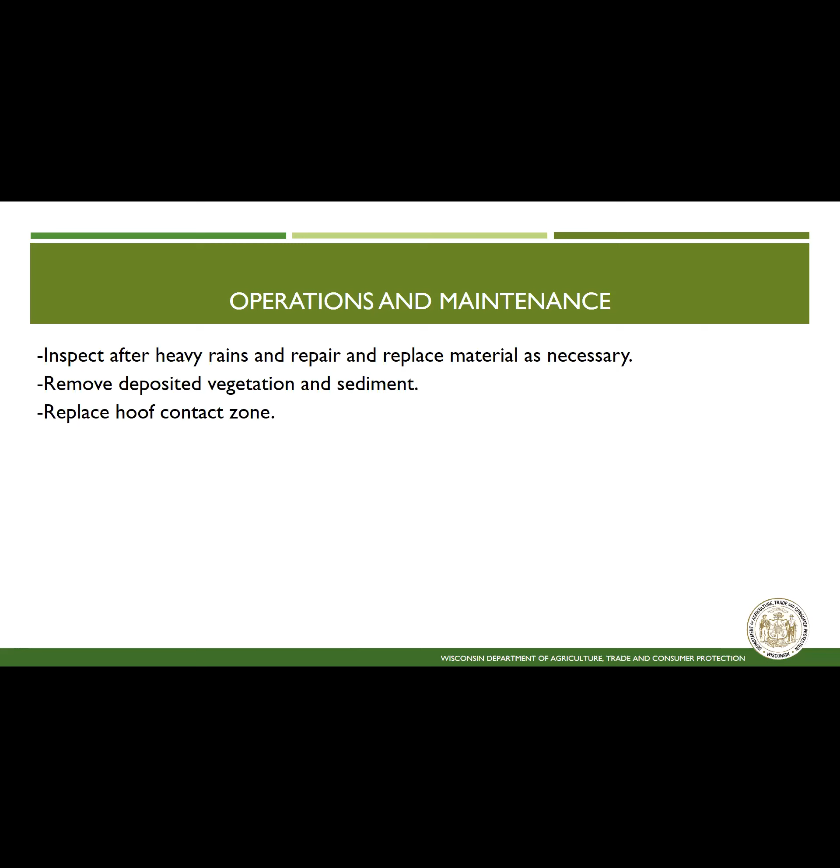So, with that, I'll turn it over to my coworker, Travis. Again, I apologize for taking into your time. I was just so excited because his practice is so cool, and I think everybody needs to know it. Well, it's good stuff, Drew. Don't worry about it. All right. I am going to stop sharing, and it is all you, my friend. All right. Hopefully you can see that.

My name, like you said, is Travis Buckley. I'm the DATCP area engineer covering the northeast part of the state. And we're going to roll right into this. Drew kind of got you all warmed up with crossings, but we're going to specifically now talk about culverts.

What I'm going to go through here, we're going to do a quick crash course in culvert hydraulics. Then we're going to go a little deeper into the 578 standard, specifically the culvert criteria. We're going to touch briefly on some design tool stuff, and then we'll get into a little bit of installation stuff to keep in mind.

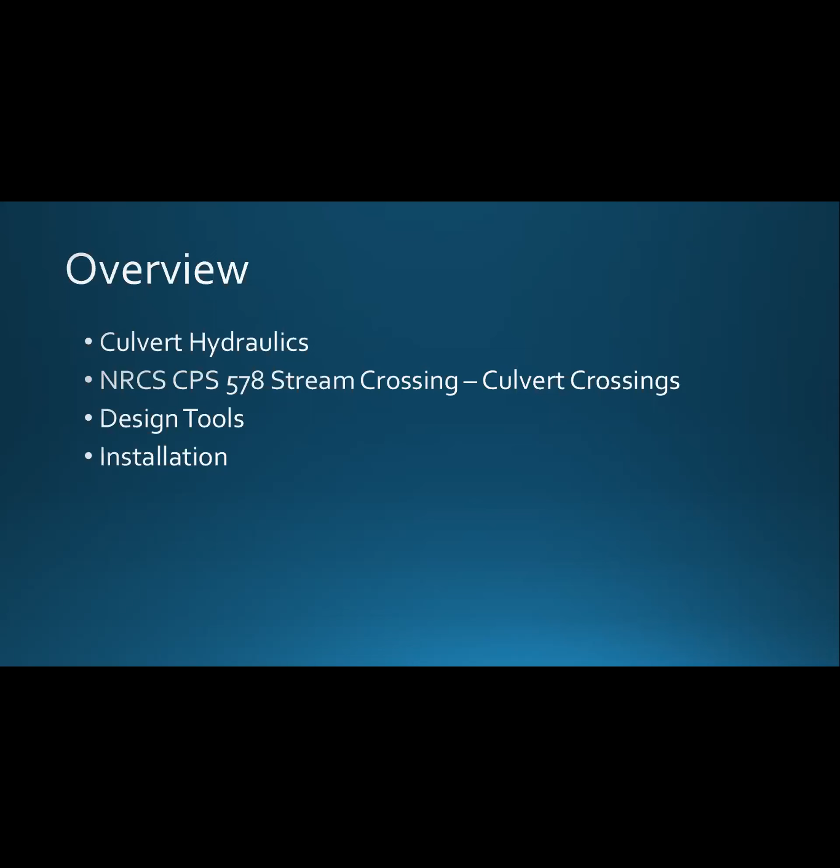So again, this is going to be pretty basic. There's a lot of people that do a lot of culvert stuff, and there's folks out there that devote their careers to culverts. So by no means are we going to touch on everything in this session, but we're going to hopefully get some basics. So first up, a quick introduction to culvert hydraulics.

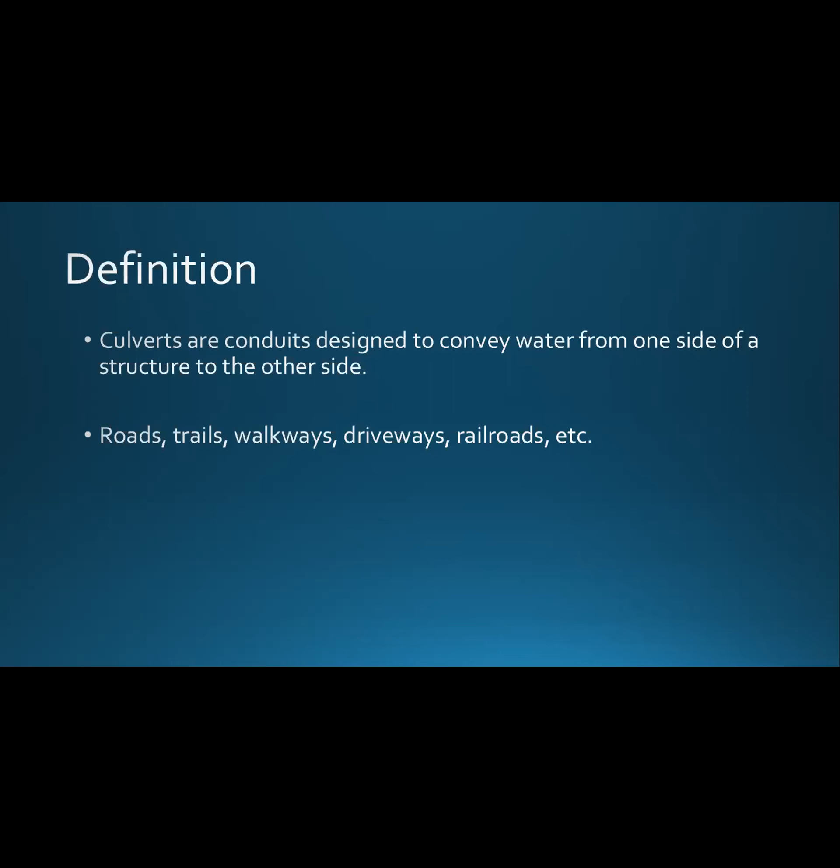So first of all, what is a culvert? Well, a culvert is basically a conduit that conveys water from one side of something to another. Pretty basic. Obviously, culverts are everywhere. Take notice on your way home from work today. There's culverts under roads, trails, walkways, driveways. Culverts are extremely common.

All right, culvert shapes. Kind of the big ones: circular. We've all seen those. Elliptical, a little less common. I used them a lot when I was doing fish passage work up in Oconto County. They worked really nice for that, especially if you have streams with lower banks, they fit into a lot of sites really nice. So we got to using a lot of them.

The arch is also pretty common, especially for aquatic organism passage. And then we can also have a square or rectangle. Usually you see these in their concrete form.

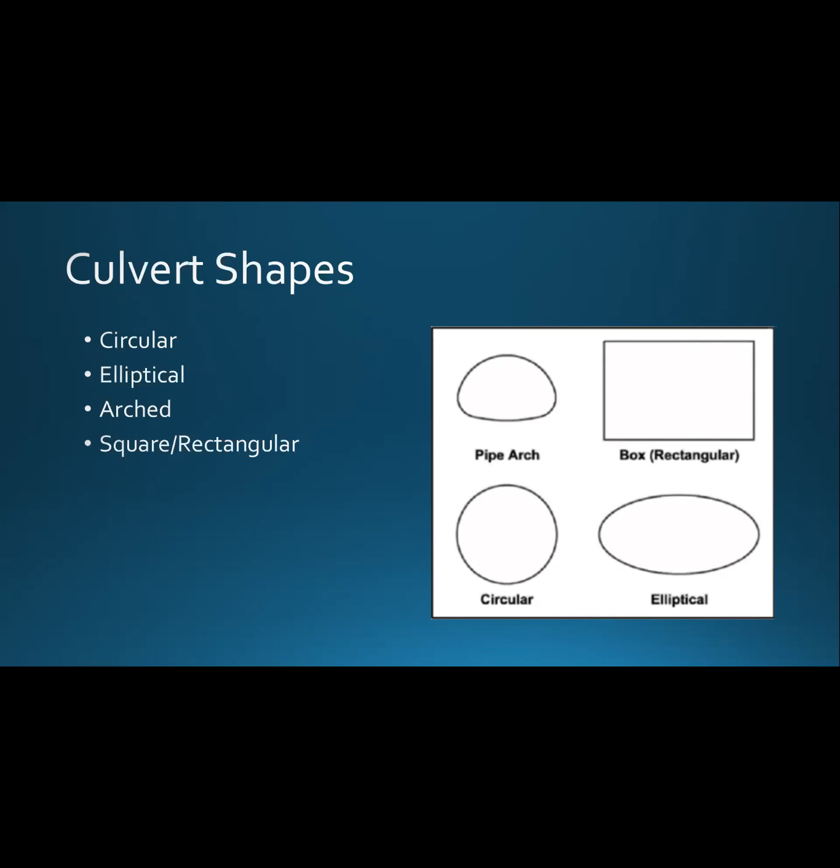So as far as material, obviously the most common one is probably metal, galvanized metal. It's pretty cheap. We can also do coated metal. Again, we're seeing more and more of this. The coating helps prevent rusting and gets some added life, longevity to the metal culverts, especially if they're going to be in submerged or wet areas. Might be worth the investment. Obviously that's a little more expensive.

Plastic culverts are also pretty common. Again, plastic is really good for longevity. It's not going to rust or anything like that. Obviously the trade-off is maybe some loading or strength issues. And then concrete, again, you see these quite a bit. Obviously fairly expensive compared to plastic and metal. And then corrugated and smooth walled is also something you're going to run into as well.

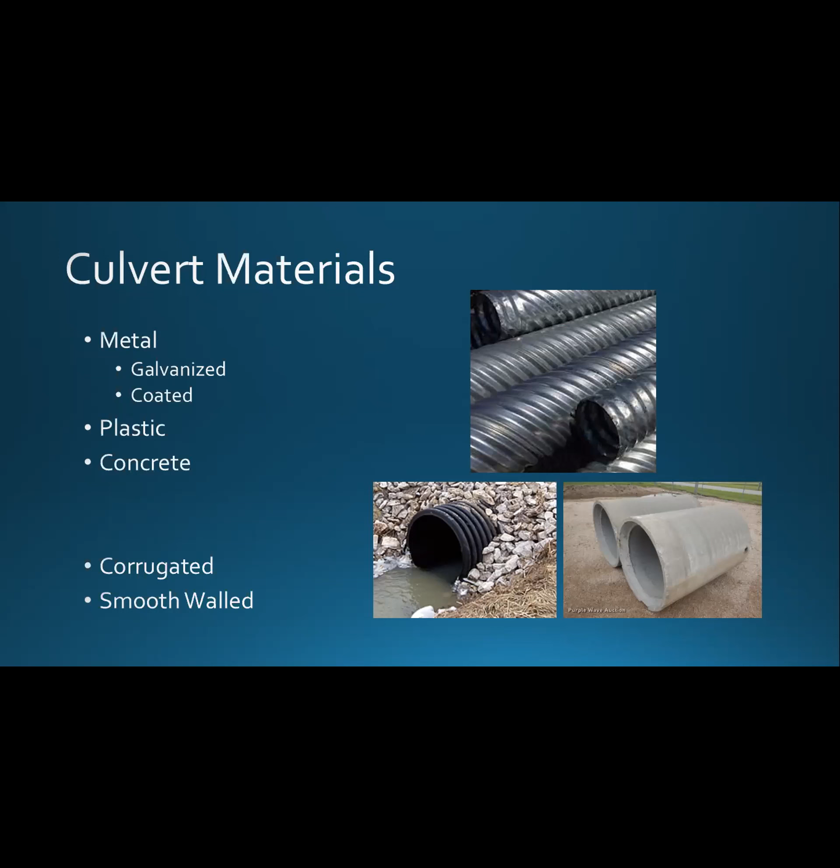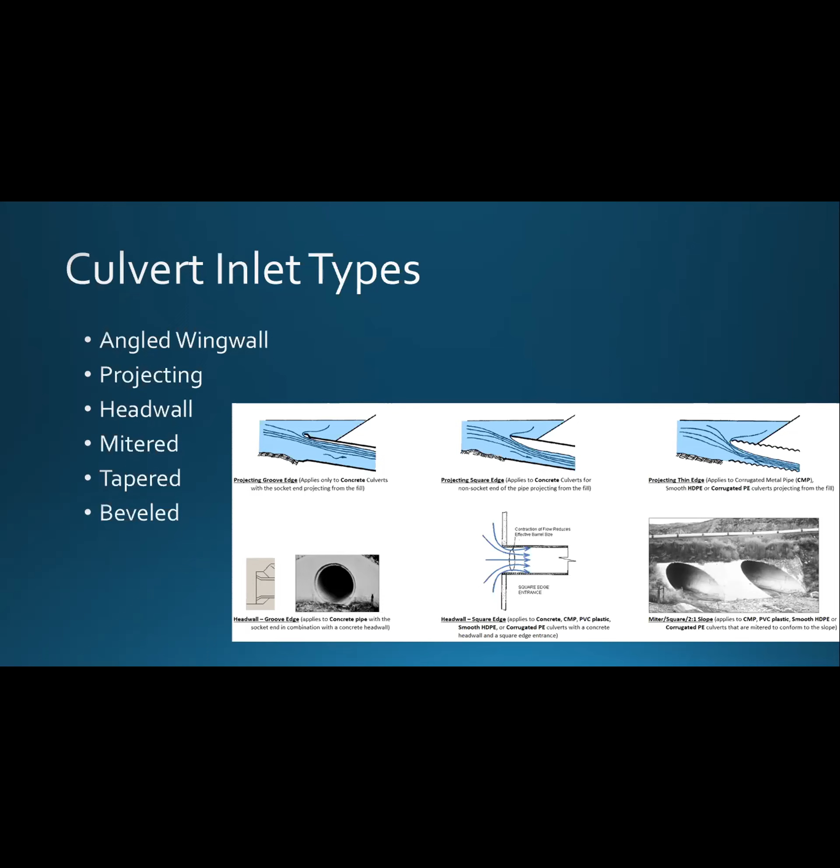All right, culvert inlet types. This is basically the entrance of your culvert. You can have wing walls, which I know we've all seen. Just the straight projecting is obviously very common. But this matters: when we talk about capacity and some of the design stuff, that entrance to that pipe has an effect on the hydraulics. So it does matter what that inlet type is. And we'll talk a little bit about that when we get into more of the design stuff, but just be aware that there's obviously several options out there.

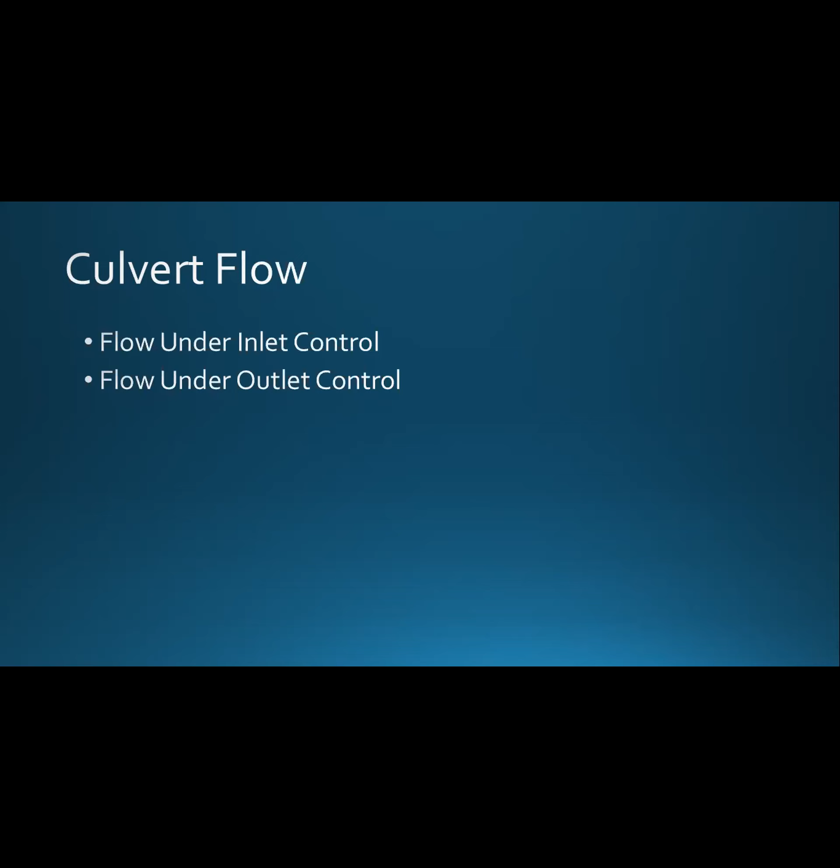All right. So culvert flow, basically we can break this down into two forms. We have flow under inlet control and flow under outlet control. The first one, inlet control, this is where our discharge and our capacity in our culvert is controlled at the entrance. So basically the entrance is acting like an orifice, and the barrel of our culvert is not flowing full and has not become pressure flow.

So you can see in the picture there, let me see if I can get my pointer up here. Yeah. So you can see in this picture here, our entrance is submerged. The inlet of this pipe is acting like an orifice and is letting less water in than what the full barrel would be able to convey. So the big things on inlet control are the headwater depth, and obviously that entrance type that we just talked about, inlet entrance geometry.

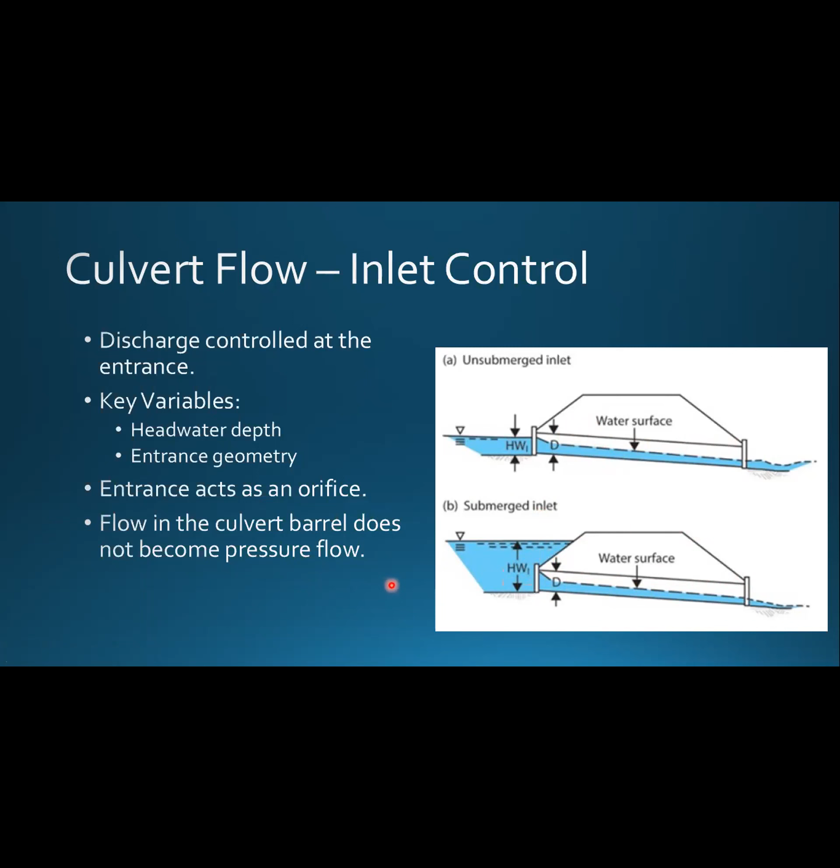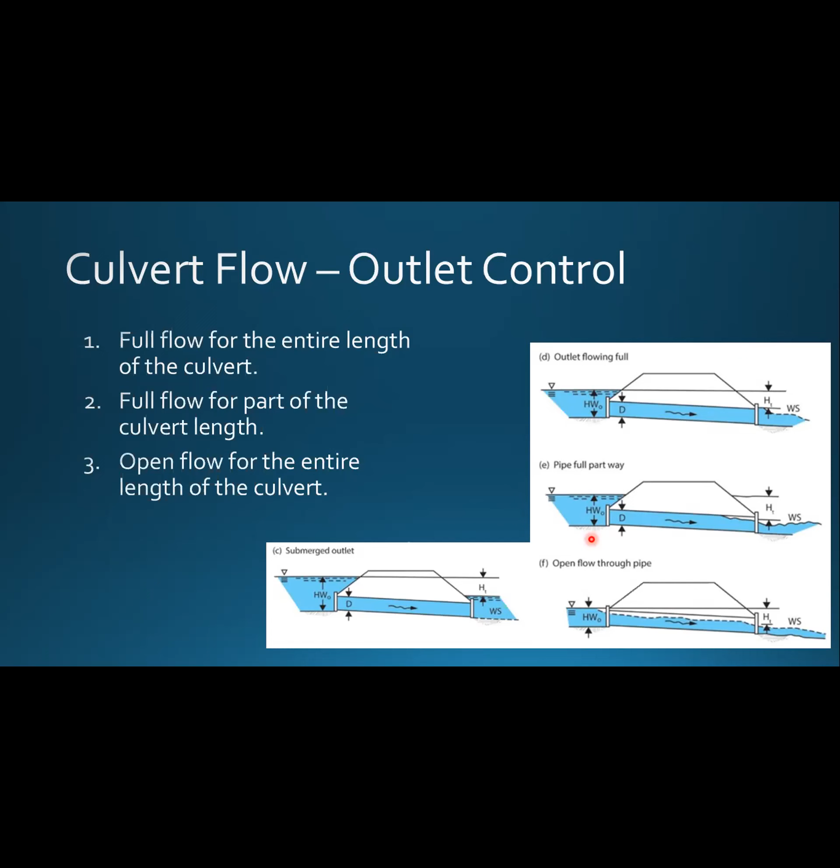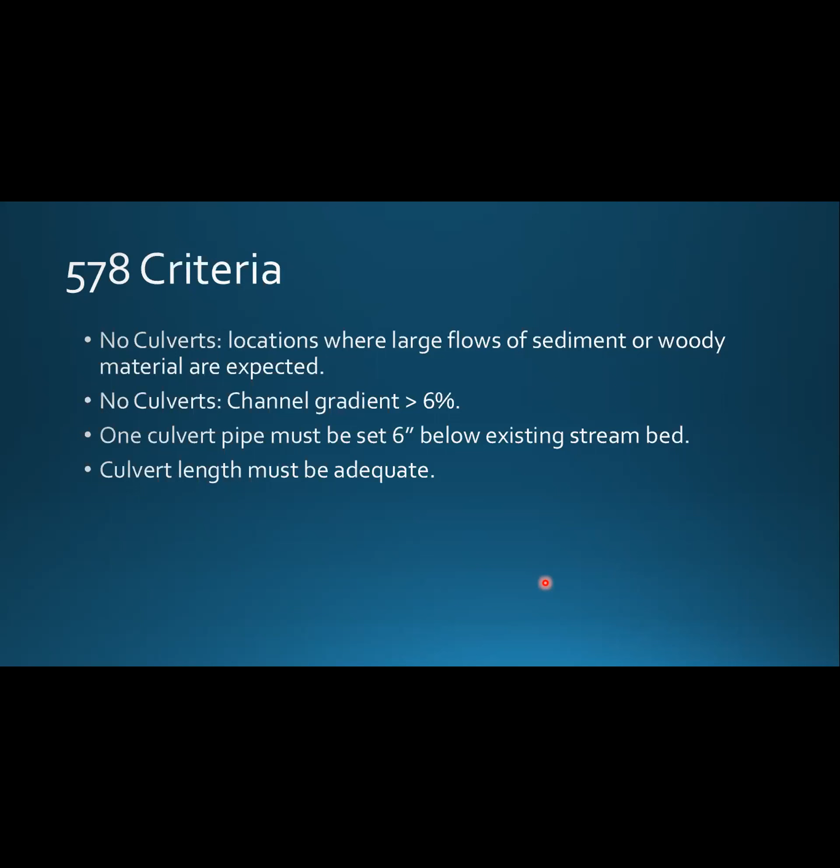And then obviously make sure your culvert is adequate length. When you're planning a new crossing, make sure you plan for, in addition to your top width, the side slopes on that crossing, and make sure your culvert extends beyond where those side slopes are going to come down.

And I would encourage this thinking on every culvert crossing, especially new ones you're putting in, just from an emergency, kind of failure analysis standpoint. It's good to know, hey, if this culvert gets overwhelmed, where's that water going to go? And can it go somewhere where it's not going to cause a problem?

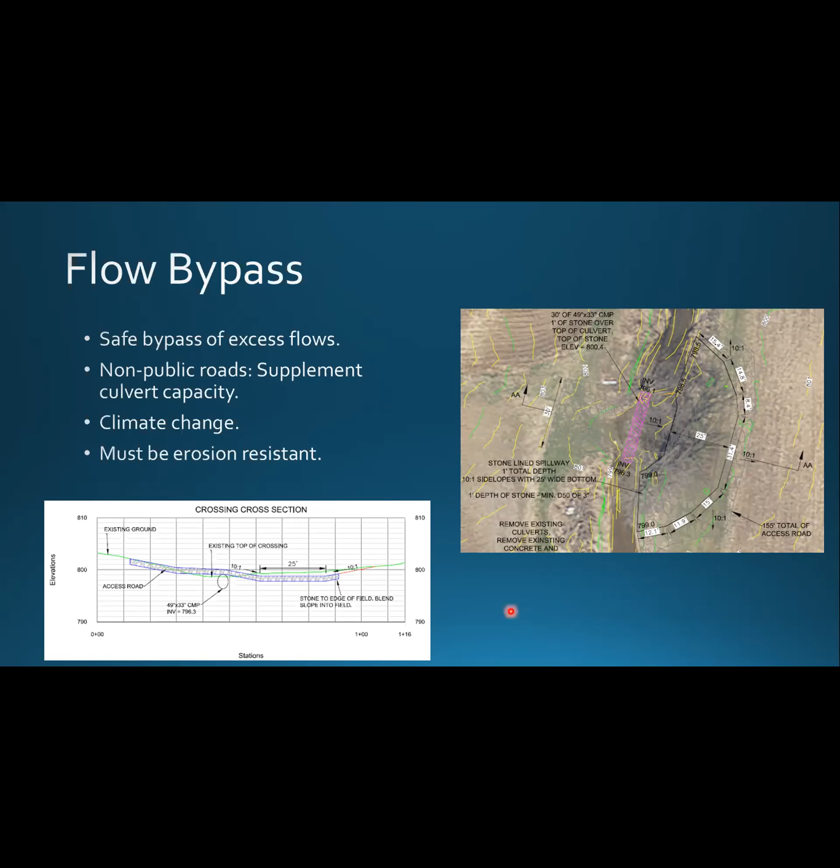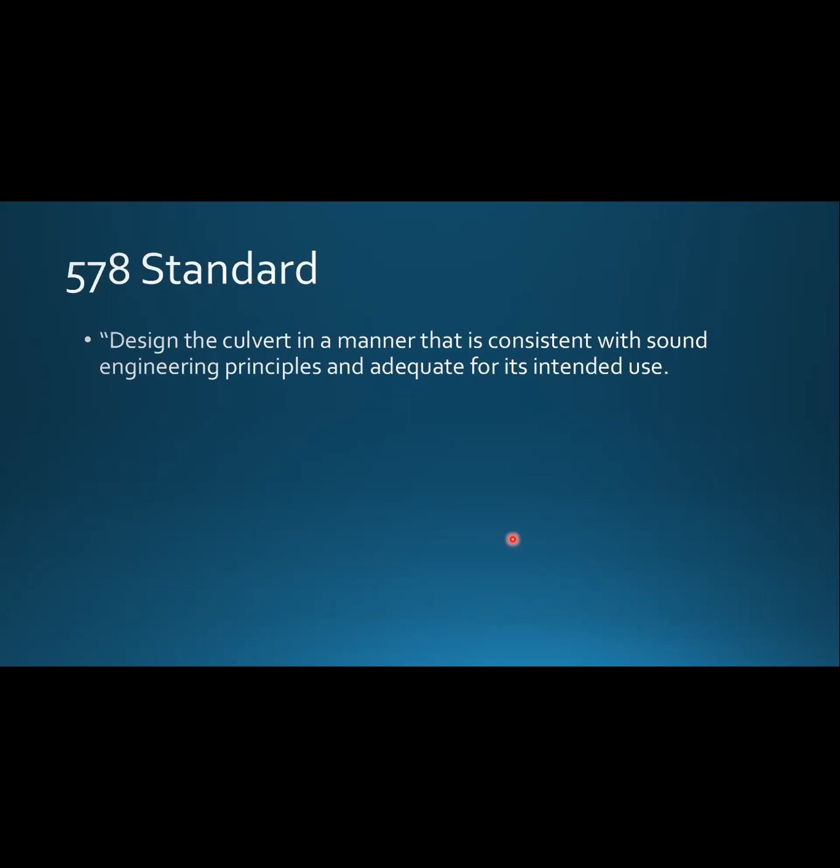All right, now we're going to talk briefly about some design tools. There's a lot of design tools out there for culverts. Use what you're comfortable with. There's a ton out there. I'm gonna talk about a couple. These aren't necessarily the best or greatest, just what I've used. The 578 standard specifically says design your culvert in a manner that's consistent with sound engineering and adequate for its use. So that's obviously pretty general, pretty basic. So whatever works for you and is going to get you good data, by all means, do it.

Again, design capacity. So if you're doing a new culvert, you're looking at table 1 of the 578 standard, and the design tools we're going to talk about. Culvert design is such that you don't figure out your design capacity and it spits out a culvert size. You need to compare what you come up with for your design capacity to your culvert design.

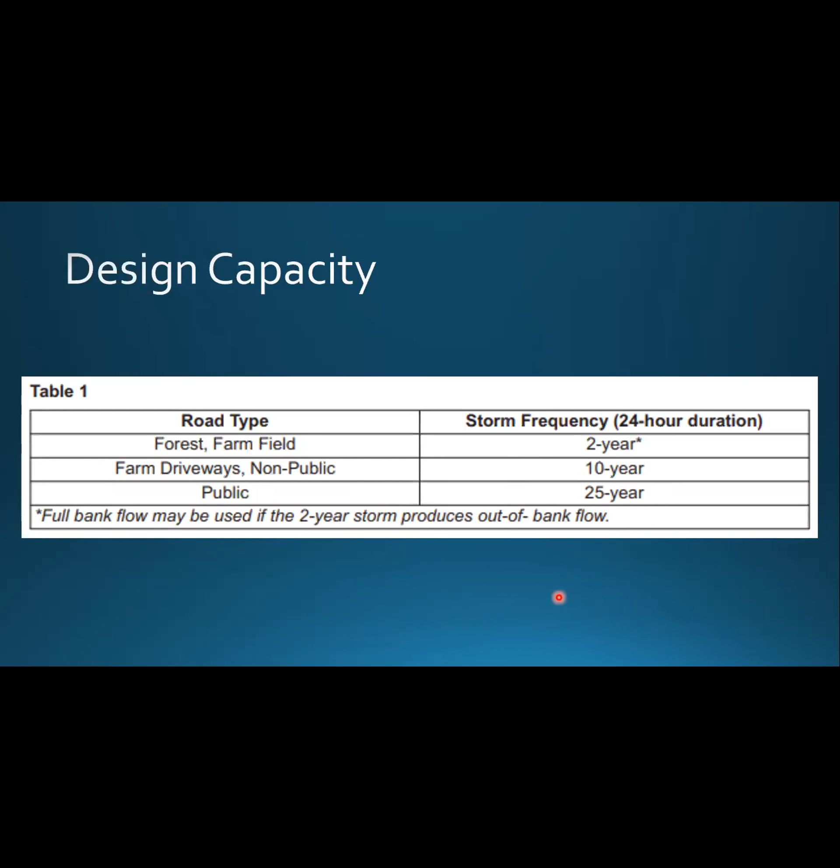So this is a whole nother course. Drew talked a lot about it earlier, so you should have a pretty good sense of it. But figuring out your design capacity of what you need and then designing the culvert is kind of the process on that. The one that I'm going to focus on today is the NRCS design spreadsheet.

And the only reason I'm using this one is it's readily available. This is right on the Wisconsin NRCS website under spreadsheets, so it's available to everyone. It's easy to access, and it gets the job done for a lot of cases here.

This spreadsheet can be used for new culverts as well as evaluating existing culverts. If you had an existing culvert, you're plugging in the information and data from out on site to figure out the capacity of that pipe. If you're doing a new one, you're putting in your planned data and comparing that to your stream capacity that you already figured out to figure out what you need for a pipe.

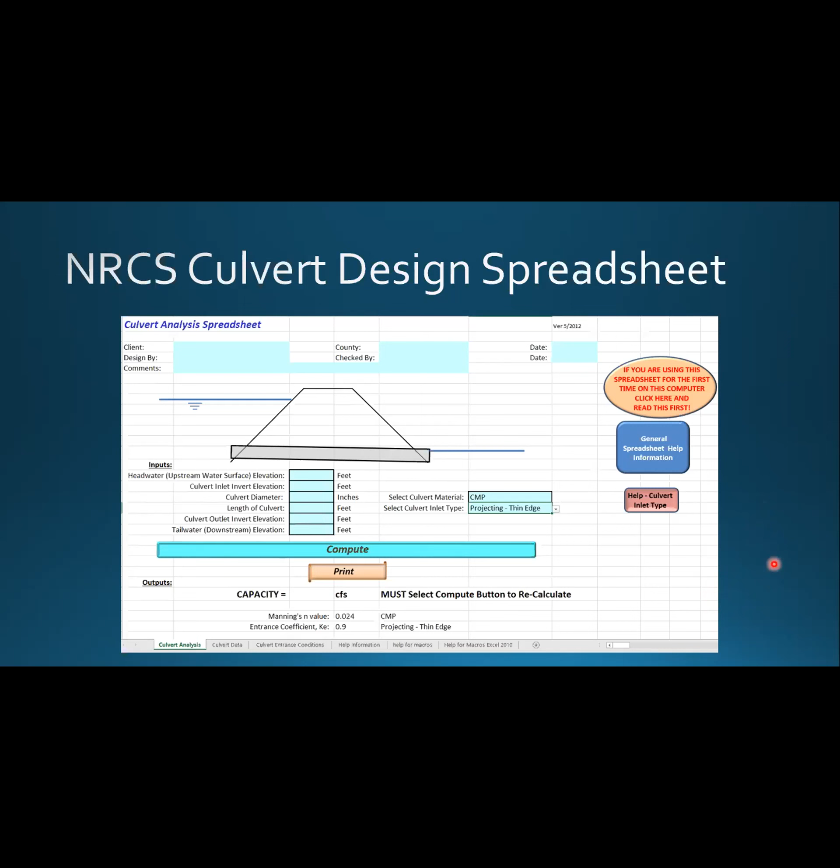This spreadsheet is readily available, and we'll go through it briefly here. But before we look at plugging in some numbers, just be aware of the limitations of this spreadsheet. I think that's important to know if it's going to fit your project or not.

The NRCS design spreadsheet is specific to a single circular culvert. So if you're doing multiple barrels or elliptical or something like that, maybe this isn't the right design tool, or you might have to keep that in mind when you're using this.

It also doesn't account for bends or slope changes. Again, not real common, usually we're doing a straight section of pipe. It also assumes that you don't have any fill, so this is assuming a clean, empty pipe. That gets interesting when we talk about having one of our culverts bedded 6 inches. The spreadsheet is not going to account for that, so keep that in mind, that could be an important factor when you're doing your analysis.

It also doesn't analyze for road overtopping. So this spreadsheet is not going to know where your road is in relation to flow or anything like that. There are other tools out there that can help with that, but just be aware that it's not going to do that for you.

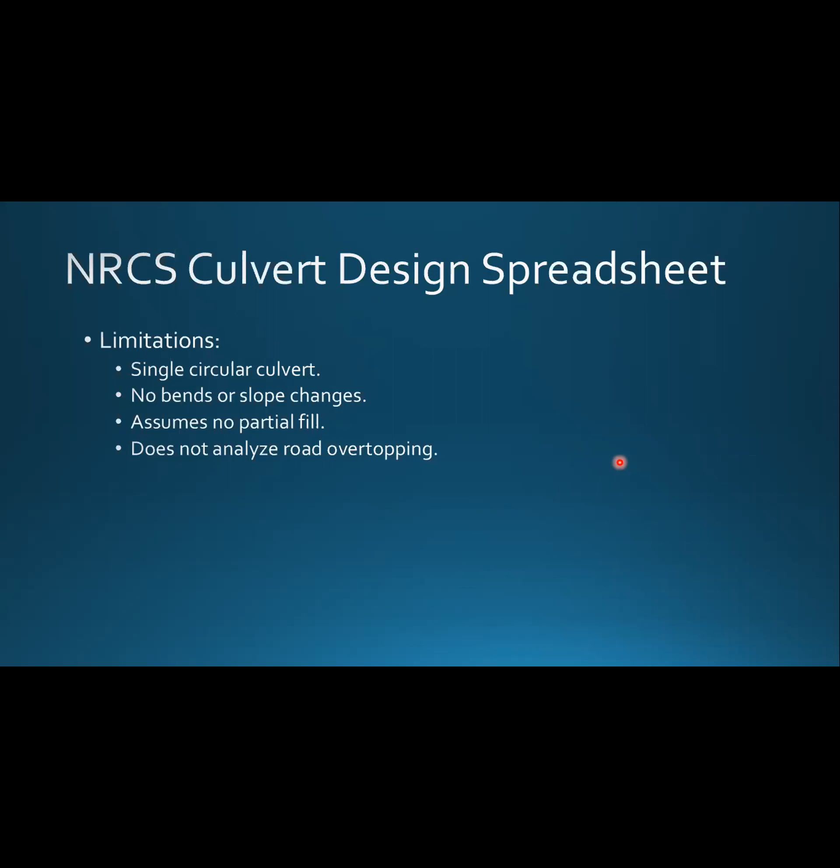All right, so this is the spreadsheet. Pretty simple input wise, you're just going to go through these green boxes. The first one is your headwater upstream elevation, so basically it's this elevation of this blue line here.

A lot of times this is approximated depending on your design storm that you're looking at. Your culvert inlet elevation, so this is the elevation of the bottom of your pipe on the upstream or inlet end. And then obviously your culvert diameter, whatever size you're looking at in inches. Then your length of pipe, your culvert outlet elevation, and then the elevation of the tailwater. Pretty straightforward, there's not a lot of inputs.

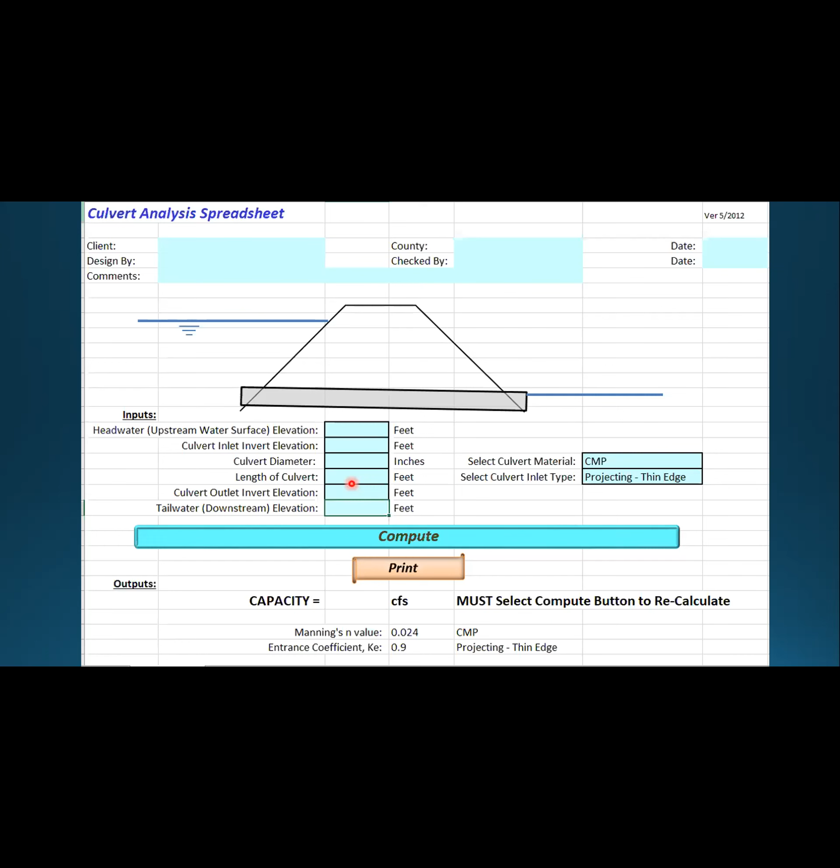Again, if you're evaluating an existing culvert, you would get this information from the field and then enter that. If you're doing a new culvert, you'd be picking this information, and it's going to be an iterative process. You might have to play with culvert diameter and things like that to get the capacity that you need for your project.

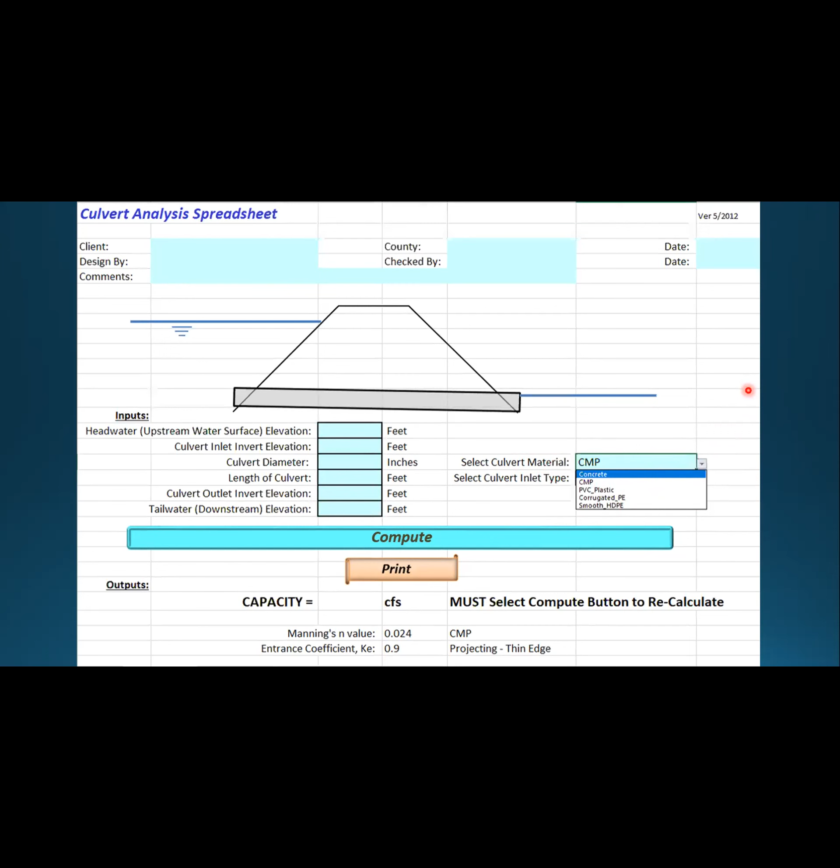All right, the other thing you need to enter is your culvert material. We already talked about some of the common ones. This spreadsheet allows you to do concrete, corrugated metal, plastic, corrugated plastic, and then kind of a smooth HDPE, the black stuff, and PVC. So a lot of options - you can do concrete, metal, or plastic, which is pretty much all you're going to need.

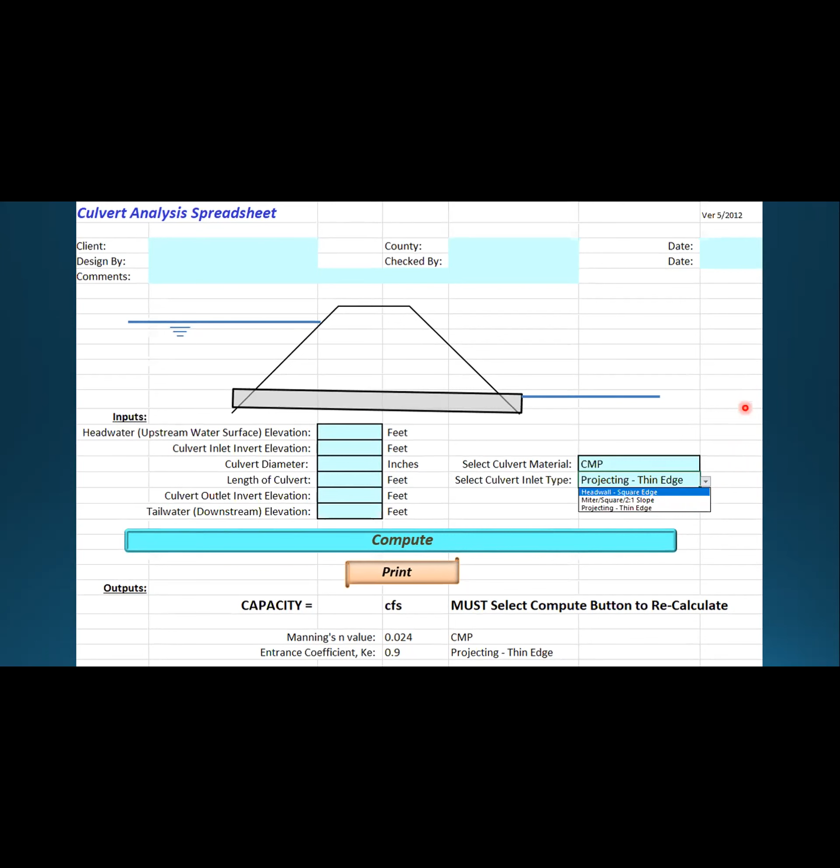And then we talked about this as well, your culvert inlet type. This spreadsheet allows you to do headwalls, kind of the projecting or the mitered. In my experience, the most common is projecting. We do a fair amount of headwalls sometimes, but obviously projecting is, in my experience, the most common, but you would pick that.

And then just to plug some numbers into this. In my fake scenario here, our culvert invert elevation - again, that's this point right here - we're calling that 100. Our headwater upstream, we got 3 feet of water, so we're up to 103. I'm choosing a 24-inch diameter culvert that's 40 feet long, and basically I got a foot of pitch on that pipe.

So down here, we're at 99, and in this case, I'm going to assume that the tailwater elevation is equal to the end of this pipe - so assuming no tailwater on this pipe. And you can see when you hit compute, it's giving me a capacity of 18.6 CFS, and it's inlet controlled, right? Which makes sense since we already talked about that - our pipe is not quite flowing full, and the inlet of our pipe is acting like an orifice.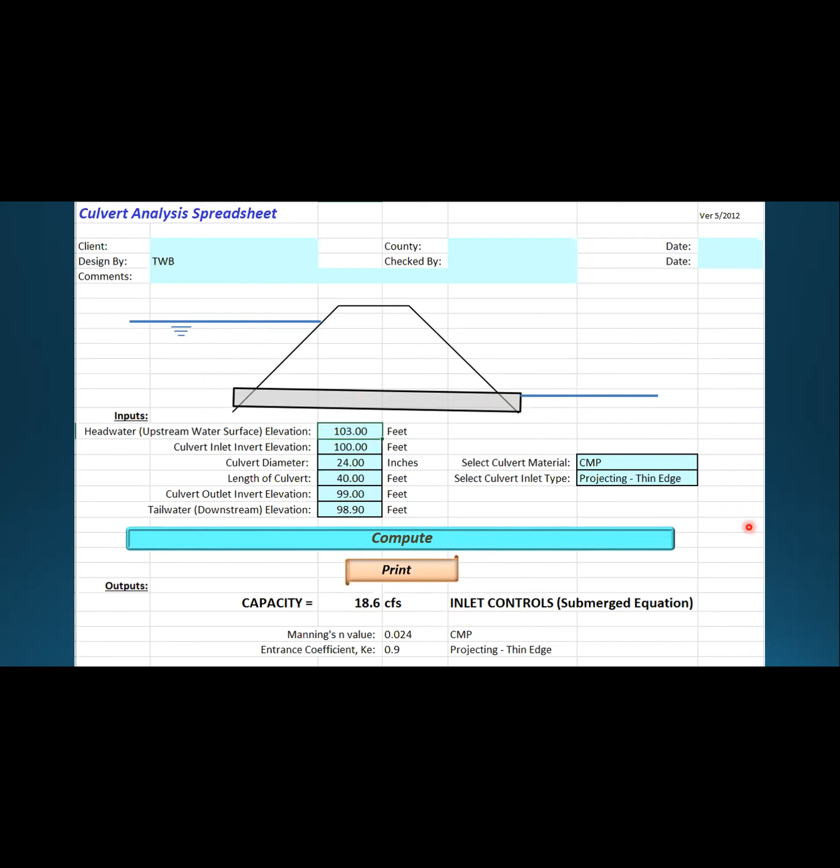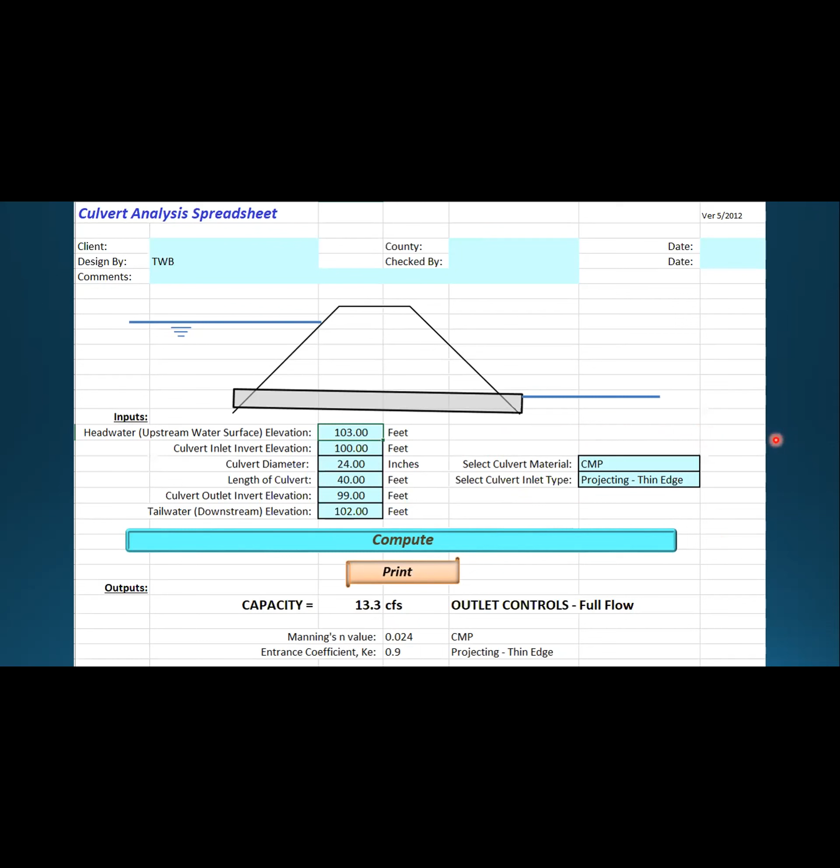All right, so the other scenario is the same pipe, same elevations, but now the outlet of my pipe is submerged. We've got 3 feet of water on the downstream end. So the inlet is submerged, the outlet is submerged, and now we've got a capacity of 13.3 CFS. Our capacity dropped because we're under an outlet control flow scenario. This just kind of shows the different flow conditions and how that affects it.

All right, the other one I want to briefly mention, just because I use it a fair amount, is Hydraflow. This is an extension within Civil 3D. I'm running 2018 Civil 3D, so I don't know if this is even still in some of the newer versions, 2022 or things like that, but it is in 2018. Basically, you go under Analyze, Design, then Launch Express, and it brings in the extension.

And it's kind of a cool extension that allows you to do culverts. There's also stuff in here for weirs, channels, and inlets. So it provides some nice hydraulics design tools.

But the culvert one, the thing that's kind of nice about this one—it's not as user friendly because it has quite a bit more inputs—it allows you to do different culvert shapes. This program does allow elliptical. It does take into account multiple barrels. I know it's kind of hard to see, but you can change the number of barrels, so you can figure out 2 culverts at once as opposed to the NRCS one.

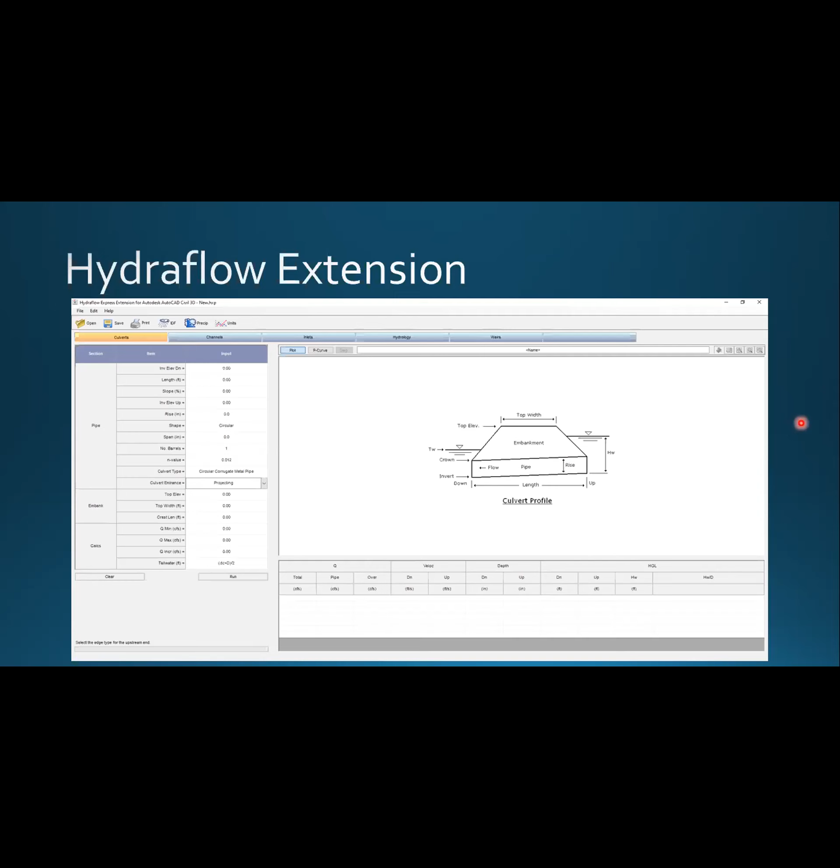So just be aware of it. We don't have time to get nitty gritty into this, but hopefully it's still out there in the newer versions of Civil 3D. Maybe somebody that's running it and is familiar with this can speak to that, but it is in 2018.

All right, the other thing I wanted to touch on real quick is culvert installation. Just a few concepts to keep in mind if you're doing a culvert installation on a project. The first one is the foundation—this is where you're going to put the culvert. We want to make sure we have a firm, stable foundation to put that pipe on. We don't want to have a situation where we set our pipe down and it starts sinking. That's bad. We also want to make sure we have that firm, stable foundation the entire length of the pipe.

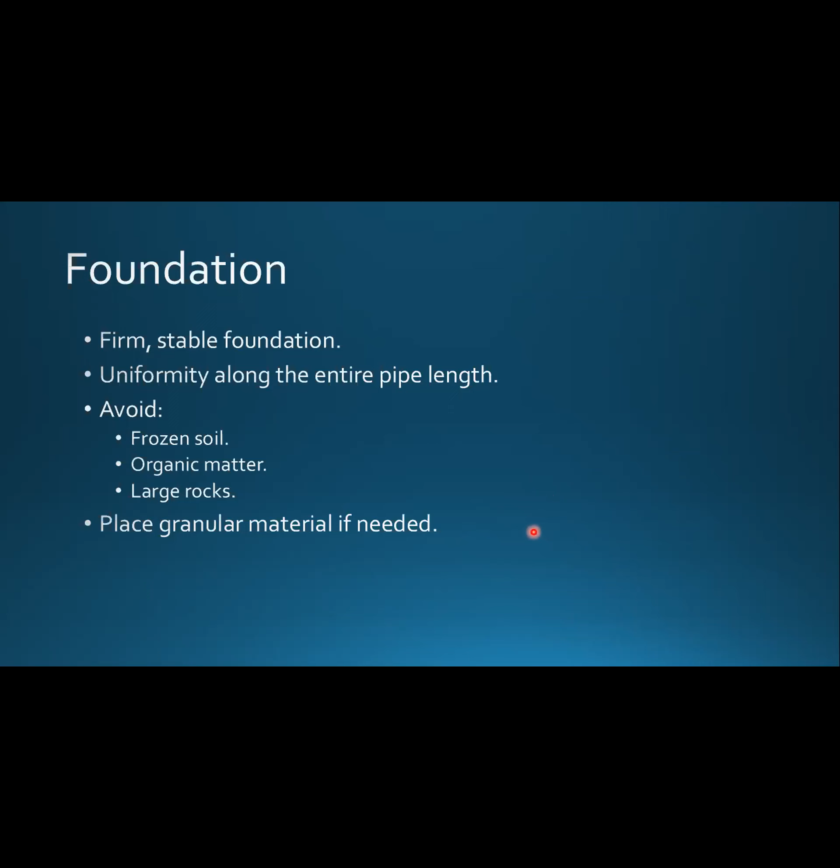We also want to avoid things like frozen soil, organic matter, large rocks. Pretty straightforward, should be pretty common sense. This applies to a lot of our practices as well. But if we don't have a good foundation, we can always place some good foundation material to get that in place. Again, we don't want to put a culvert on goo.

The other thing I just wanted to mention—a lot of times you're not going to be able to get a culvert that's long enough for your application, so in that case you're going to have to band it together. This is something the contractor is going to deal with, but just work with your pipe supplier and figure this out. This is for corrugated metal. Concrete or plastic is going to have some different banding or connections, but this is a common one for metal. This can be—I've heard some contractors cuss at these, especially doing, we were banding some elliptical pipes one time, and that was a real pain in the ass, to be frank.

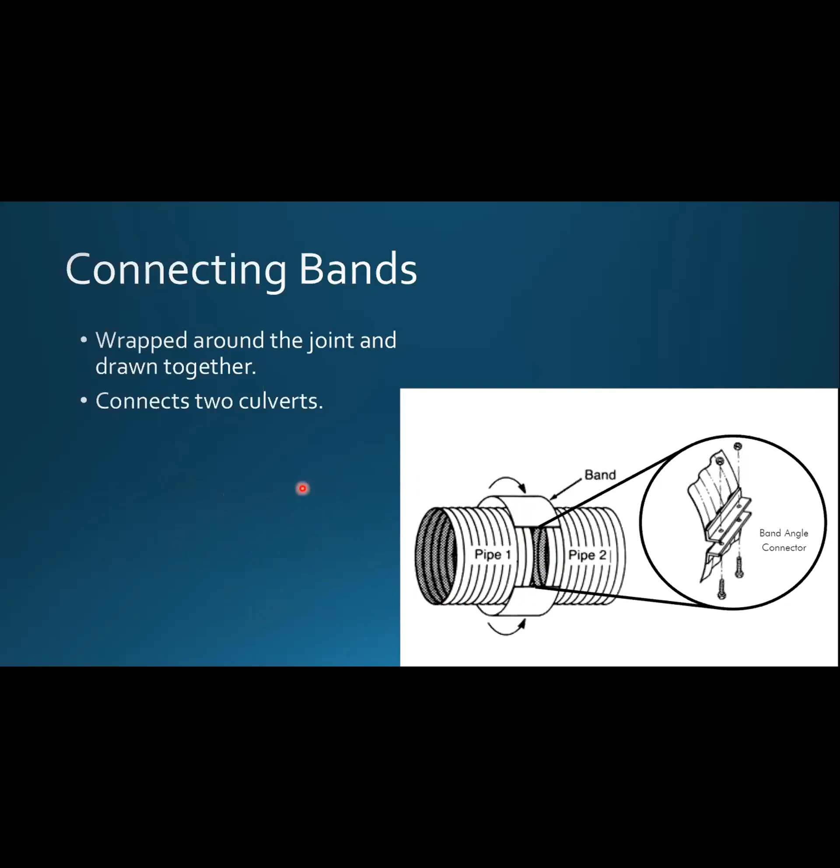All right, culvert backfill. This is key for success of a new culvert. We want to make sure we have well-graded granular material if possible. Again, we want to avoid frozen material, organic matter, large rocks—that's just not good fill material.

And then compact—cannot say that enough. We want to compact all the way around this pipe, trying to get good compaction around the haunches. Usually that's done by hand with like a 2x4. You want to make sure you're filling evenly on both sides and along the entire length of the pipe, so you don't want big globs of fill going down your pipe and trying to compact. We try to get 6 to 8 inch lifts that are uniform down your pipe, and then again compact. That's going to be huge for longevity and success of that pipe.

And then as far as fill over top, again, that's going to depend on what your crossing use is on that project.

I was always taught, shoot for at least 1 foot of cover or half your pipe diameter. So if this is a 36-inch pipe, you want to try to get 1.5 feet. Right or wrong, that's kind of what I've used in my career. It seems like it has worked pretty well, but try to get at least 1 foot of material. Again, what the load is on this culvert is going to have an impact, as well as how the elevations work. You don't want a giant hump over your culvert, or you might not have a happy landowner. So it's going to be somewhat project dependent and material dependent.

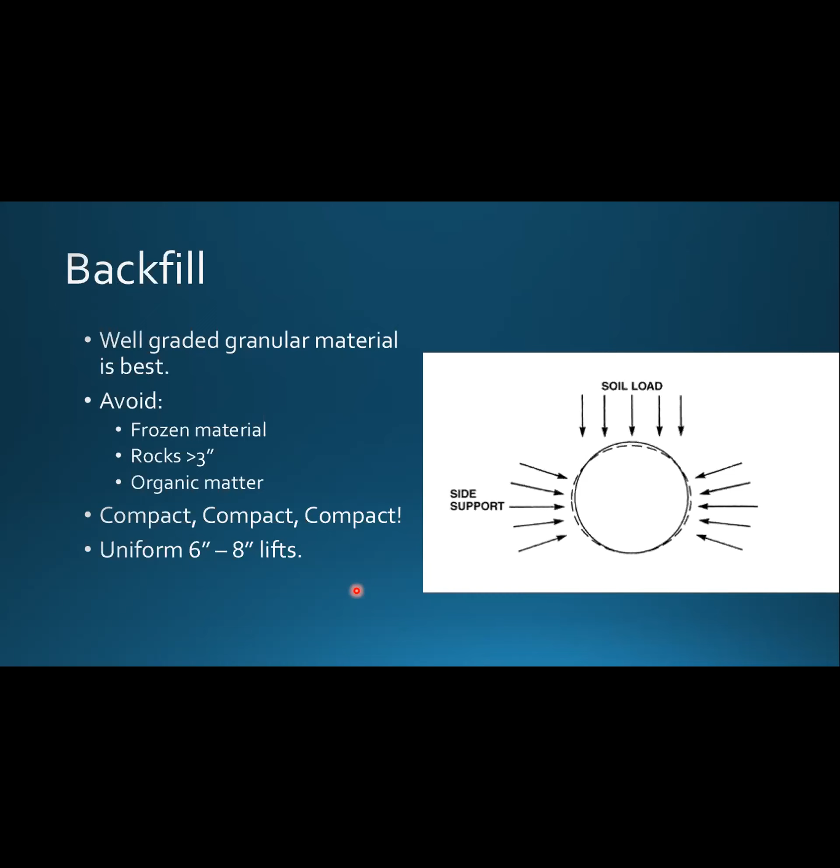Granular material, we're talking well-graded sand, gravel is what I mean by granular. Something you want that's going to compact, so that's where well-graded comes in. Well-graded means you have a variety of particle sizes. So sugar sand or washed stone - 2-inch washed stone would be an example of poorly graded, and that would not be what we're looking for. We want a variety of size material that's going to lock together nice and compact nice.

Alignment is also important. You need to think stream hydraulics when you're doing your culverts. I've replaced a lot of culverts, road crossings that went religiously perpendicular to the road, but the stream didn't necessarily go perpendicular to the road. So when replacing that culvert, maybe it's a good idea to add a little length to the culvert and put it at a bit of an angle. You're going to improve hydraulic efficiency as well as potentially organism passage. So keep alignment in mind.

Also keep your upstream and downstream conditions in mind. Are you going to have an erosion concern downstream with your culvert? Are you going to have sediment deposition upstream? Things like that are important to keep in mind when you're doing a culvert crossing.

And we talked about this a little bit - your loading, what is that culvert going to be used for crossing-wise? Are you going to have heavy machinery? Are you going to have foot traffic? All that plays into what your fill materials are, what your fill height's going to be, what your culvert material is going to be, all that stuff.

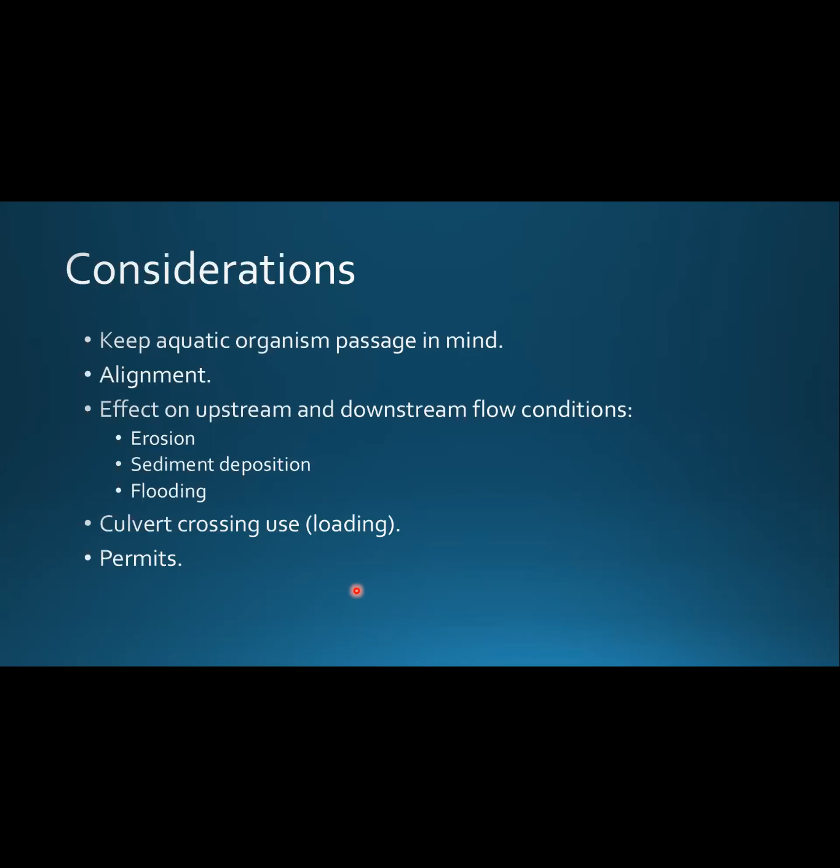As far as permits, that's a dark rabbit hole that we don't really have a ton of time to get into. My say would just be, culverts are permitted. So talk to your DNR waterway permit folks and work with them. If you're replacing a culvert or putting in a new culvert, talk to DNR and get them involved. They're going to be the experts on what's required or not. I mean, there are exemptions out there, but they would be the experts on that.